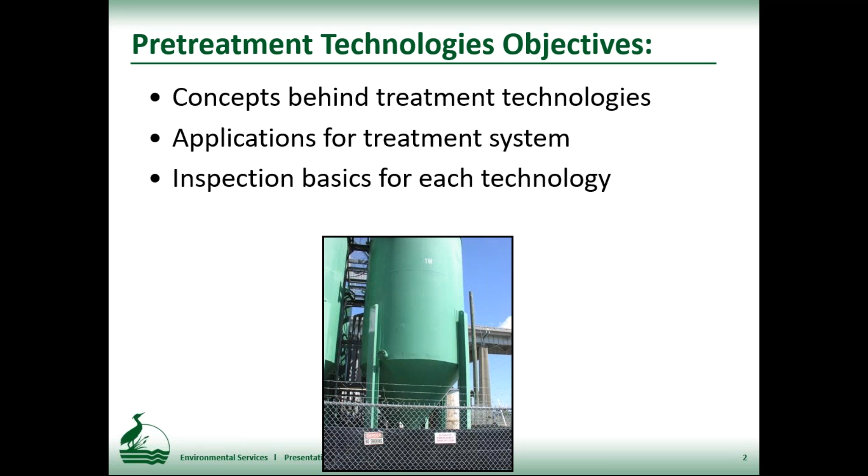All right, so essentially we're going to go over a bunch of different technologies, talk about the concepts behind the treatment technologies, applications for each of those systems, and then what are some inspection basics. And inspection basics are going to be questions. Last week, listening to one presentation, the speaker talked about the importance of just asking questions and follow-up questions. And really, that's been my experience as well. That's how you conduct a really thorough inspection. So I've gone through and redid this presentation with questions in mind.

These are different types of technologies. It's a pretty large presentation, so let's get started with it. First off is equalization. Okay, so equalization, basically all you're doing is providing a lot of capacity that allows variable waste streams and variable flows to collect and commingle. So you get more uniform characteristics in the waste streams, as well as a more uniform flow rate.

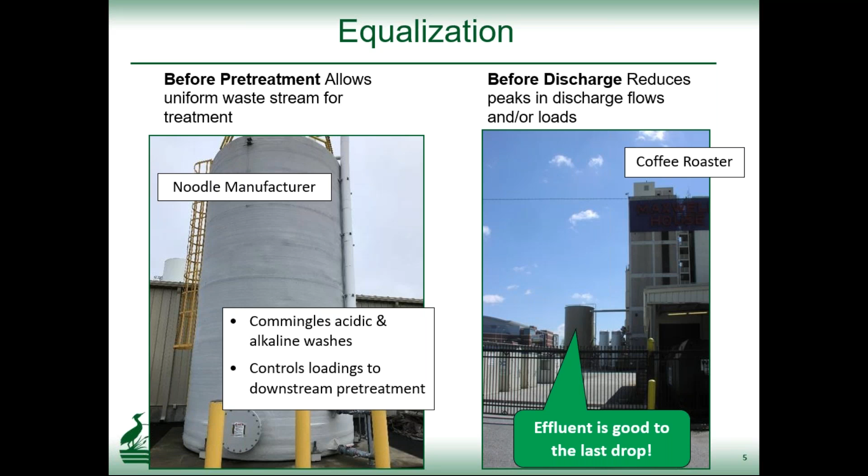We were having issues from their discharges with essentially BOD, or we measured it in COD. And instead of putting organic treatment in, what they did is they just put a really large equalization tank in, and were able to essentially feed effluent from that at a constant rate and get rid of peaks. And I'll show you a graph that kind of shows that effect.

Now, if it's a categorical facility, one of the questions you might ask: are regulated and non-regulated waste streams commingling in the equalization tank? And if they are, have the categorical limits been adjusted accordingly, either using flow weighted average or combined waste stream formula?

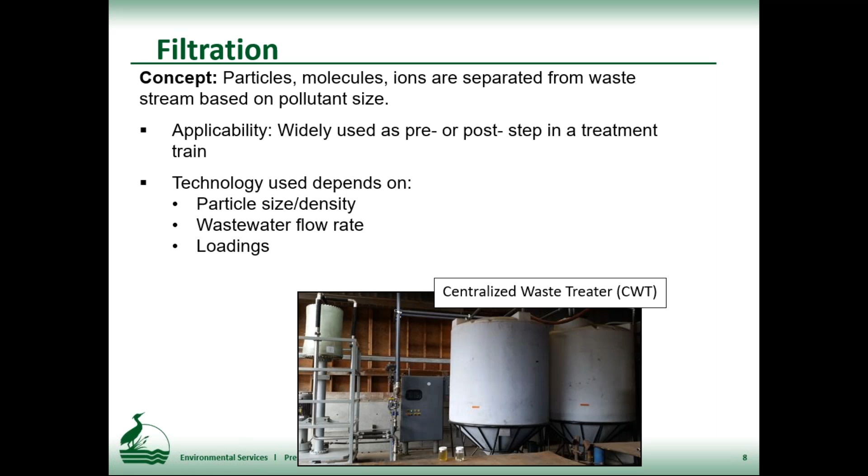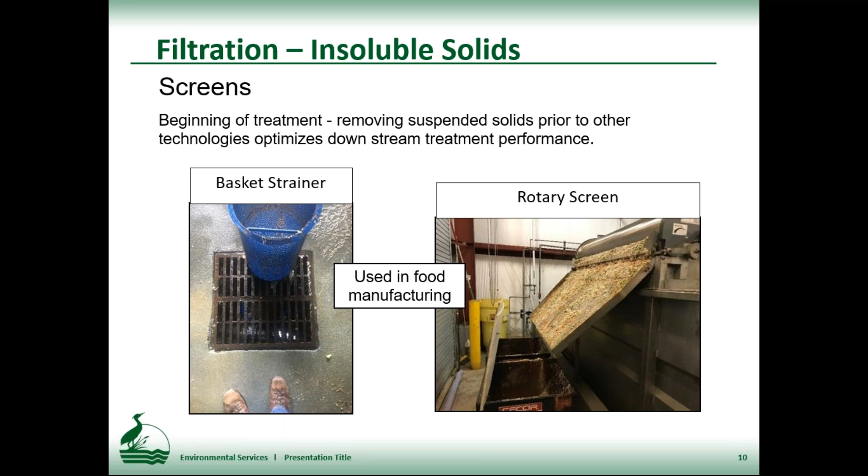All right, filtration. First off, we'll talk about insoluble solids here. You know, just screens, basic screens, basket strainer, rotary screen. Both of these are food manufacturers. These are installed basically for the purpose of optimizing treatment systems further down the line. You don't want these solids going to the further down treatment systems. One, it can interfere with the treatment system, and also it can overload that treatment system with particles that can be much more cheaply removed by using something like a basket strainer or a rotary screen.

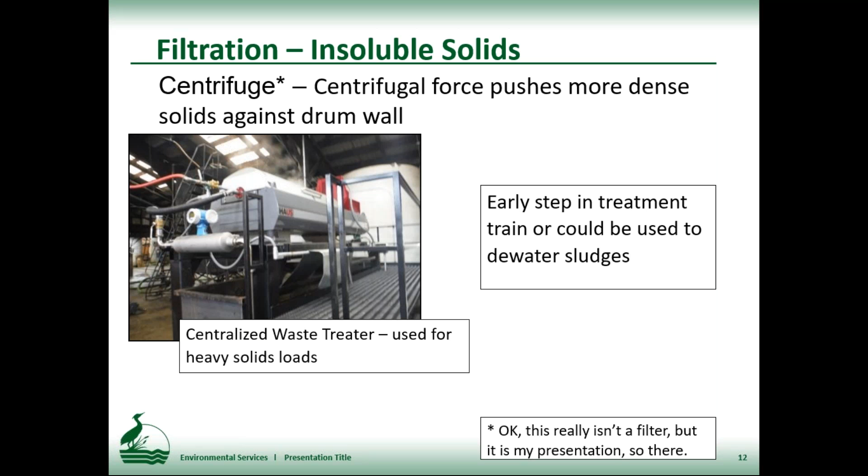All right, filtration inspection tips. How are the solids removed from the filter? And again, anytime we talk about solids, you kind of get the same theme. What's the hauling frequency? What's the destination? Do you have hauling records? Review the hauling records.

I really don't want to go over those, but if you ever want to reference, that was the intent there. So I was going through this thinking there's just not a whole lot to talk about when it comes to filters. I mean, it's tough to really screw up filters. And then I remembered 2017.

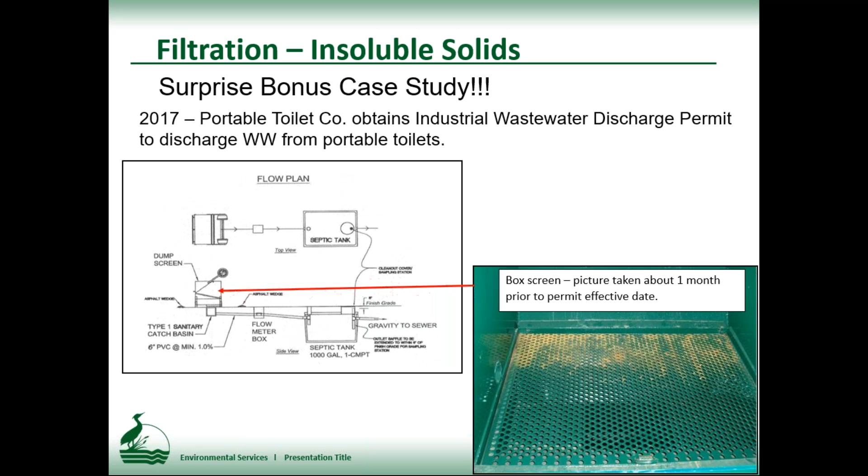So everything looks fine to go.

About a month later, after we're out there, the city pump station fails on multiple days due to clogging. This is the debris they pulled out of here—you see some bandanas, earplugs, a lot of this white material. I have no idea what it is, but I was told it's the backing off a tape called mule tape that's used in construction. So a lot of construction related materials.

This went on for maybe 4 or 5 days before we were ever contacted. Once we were contacted, we asked about any new permittees in the area. We did have one new permittee. We went out there, and this is what we found.

The box spring, or box screen, had a fairly large slit cut in it, allowing solids—as you can see the solids hanging off, large solids—to be discharged through that. This was like the most epic fail in pretreatment permit history.

The very first day that they discharged, our pump station failed. It failed every day that they discharged. They had to maintain discharging records, and every day that they discharged, the pump station failed. We made them fix the screen once we figured out what they had done, and once the screen was fixed, our pump station stopped failing.

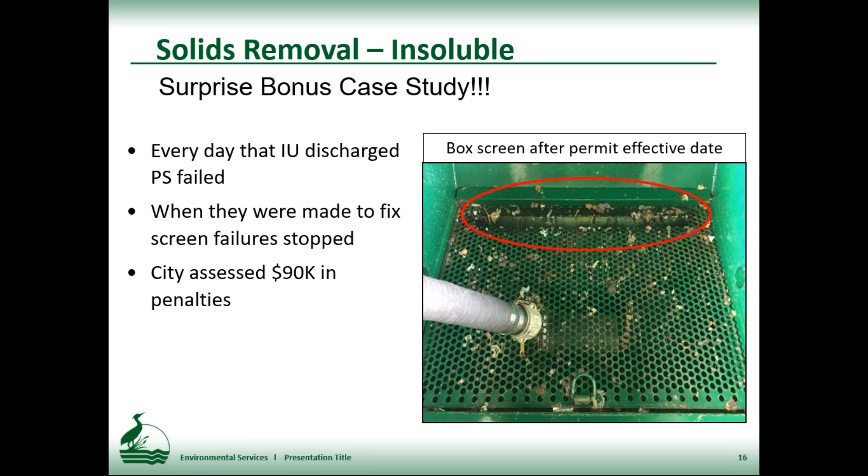So I think it's all about eloquence and presentation. If you're offended by me using the word turd, a code hearing officer feels it's perfectly fine, and it will actually be a successful strategy in an appeals case.

All right, let's talk real quick about solids removal for soluble solids. Previously we talked about insoluble solids—now let's talk about soluble solids. It's typically a polishing step. It's used to achieve, in some cases, stringent effluent limits. In other cases, it may be used just to produce effluent that can be reused. Two basic categories: media and membrane filtration.

For media, one type is ion exchange. You'll see these blue canisters—for some reason blue is like the color of choice for filtration. They're full of all these little resin beads, and these resin beads have a charge on them: a positive charge, which is a hydrogen ion, and a negative charge, which is a hydroxide ion. It's used a lot in water treatment. This graph really shows water treatment, but it works the same way for wastewater pollutants.

So this is just salt, if you're using it to remove salt from a waste stream. Essentially it's a simple replacement: the sodium has a positive charge, it replaces the hydrogen; the chloride has a negative charge, it replaces the hydroxide. So you have sodium chloride solution coming in, and water essentially coming out.

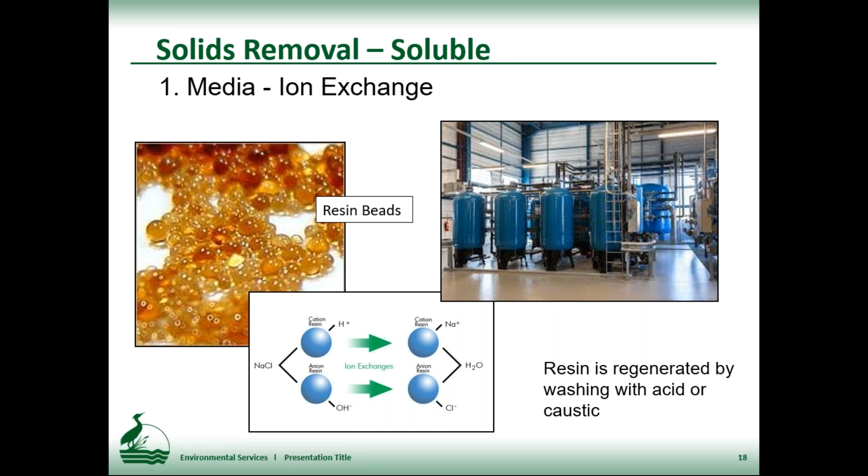If they're doing the regeneration at the facility itself, then you need to ask them, well, how are you doing with the effluent from the regeneration? And you should also be doing some type of neutralization with it.

Another media is zeolite. This is from a centralized waste treater, and they use this because they have some pretty tough metal ion limits as a centralized waste treater, so they use this as a polishing step. It's a natural clay, very porous, so it's got a lot of surface area for adsorption. It naturally attracts cations just from the natural clay, and they can also chemically modify it so it can attract other types of ions and organics as well.

All right, membrane filtration. So these are the different types of membrane filtration. It's all based on particle size. These are the microns.

It goes down to reverse osmosis. This is basically how it works. Your wastewater is going into these tubes. These tubes have a semi-permeable membrane, which basically means it has pores that let certain things in, other things it doesn't let in.

There's a lot of pressure. The water leaves it, and obviously very small ions, depending on the pore size, will also leave this as well, and that's called the permeate. So the clean water comes out, and the concentrate, which is where all the pollutants are, basically passes through.

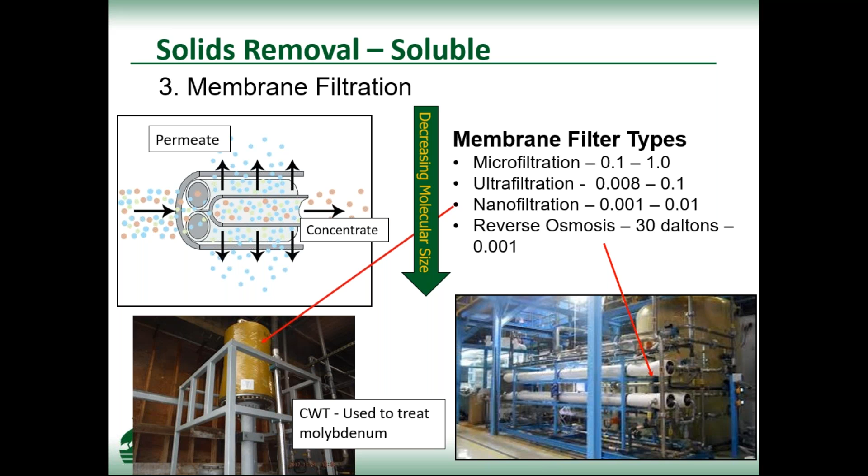So for solids removal, if it's a media, here are some inspection tips. How do you determine when the media is spent? Again, media is essentially going to attract ions to its surface, and after a while that surface is completely filled and it's not going to accept any more ions. Now it doesn't get clogged, the water can still pass through it, so how do you know when your media is spent? What do you use to determine that?

How is the spent media managed? Do you manage it on site? If you manage it on site, what are you doing with those ions that you've pulled off of it to reuse it? Or does a third party take it off site?

If it's a membrane, how is the concentrate managed? You're pulling this concentrate, this water that's full of pollutants. Where are those things going? Are you discharging them back into the sewer system, or are they being managed in some other way? And then what's your membrane maintenance frequency? Remember, membranes have pores, and eventually those pores foul and they do need to be cleaned.

All right, oily water treatment.

Just to let everyone know, during the pandemic most of my verbal communications has been grunts, which really isn't too different from before the pandemic, but it's intensified. So I haven't spoken this much in a long, long time. So if I stop talking, it's because I've lost my voice.

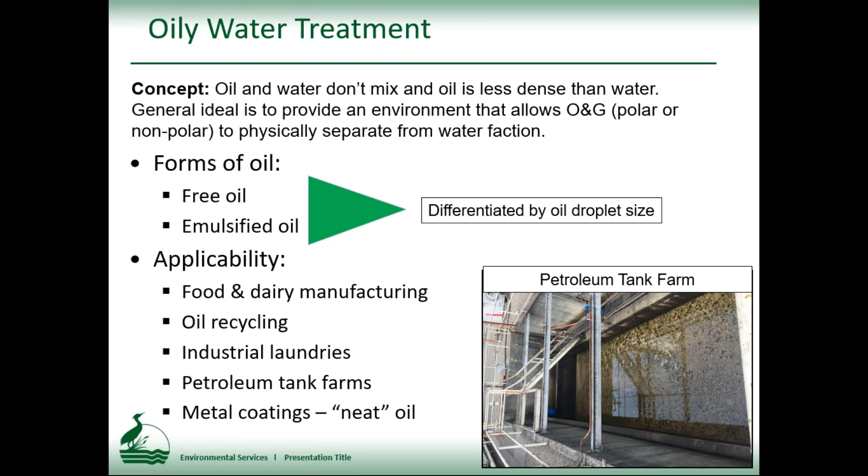This is really important. In industrial applications, oil loadings are an issue. If you have a heavy oil generator, having your typical in-the-ground type of oil water separator can be difficult because essentially you're producing too much oil to be able to physically remove it. So having some way where it's automatically draining off is key for these to work. It'll work if we're talking about an auto shop because you're not producing that much oil. But from an industrial perspective, there'd be a lot of loadings from oil, and you'd have to maintain these things a lot if you didn't have some type of way to collect the oil continuously.

Different separation aids. This is a coalescence plate. Basically, it's made out of plastic, has a lot of surface area. Oil does not attract to water, but it does attract to plastics, so that helps bring the oil out of the water fraction.

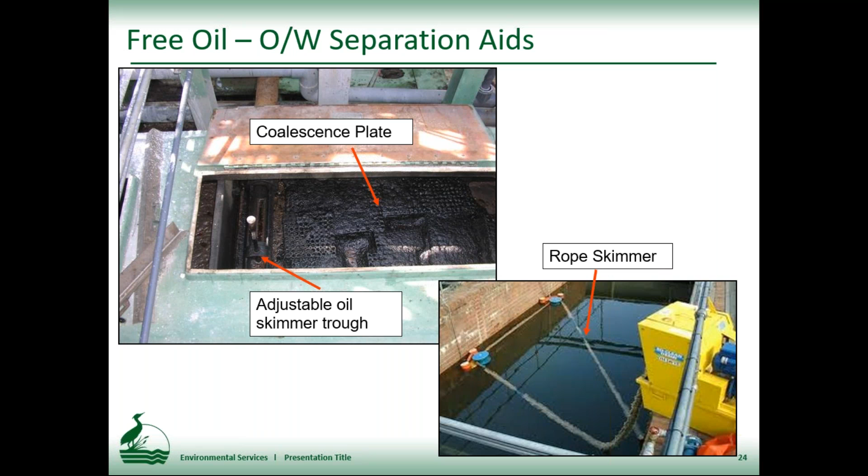Also have a rope skimmer. The rope skimmer has kind of like a plastic type of rope, which attracts oil. It continuously is going, revolving through here. It comes up into this mechanism. There's actually a squeegee in here, and the squeegee squeezes oil off into another container.

All right, so let's talk about dissolved air flotation. The concept is you're going to add chemicals to bind these oil droplets together. Then you're going to put a waste stream into a tank with some pressurized air, and it's going to float to the top. So it's going to create a flock, and that flock floats.

It does work with emulsifications if you reduce the pH. Emulsification agents are things like detergents, degreaser solvents. Mechanical agitation can also lead to emulsifications, which are just really small droplets that are more difficult to separate from the waste stream.

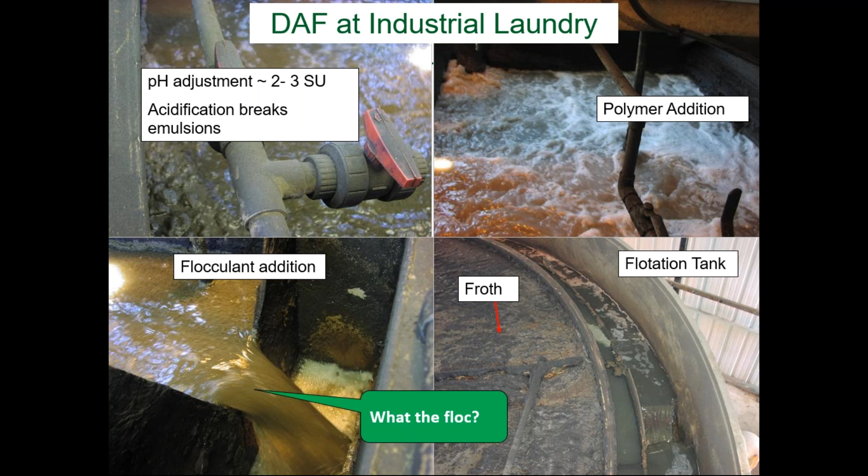One of the big failures I've seen with industrial food production is installing gravity interceptors for grease. The problem with the gravity grease interceptor in a large food manufacturer is they produce more grease and solids than what a gravity grease interceptor can maintain. So essentially, you can't pump them out enough to prevent grease and solids accumulating so that they eventually pass through a gravity grease interceptor. Over time, we've had to require upgrades from these large facilities that initially installed gravity GRDs and haven't put in something like a DAF unit. And those have been successful. That stopped the oil and grease issues that were occurring downstream.

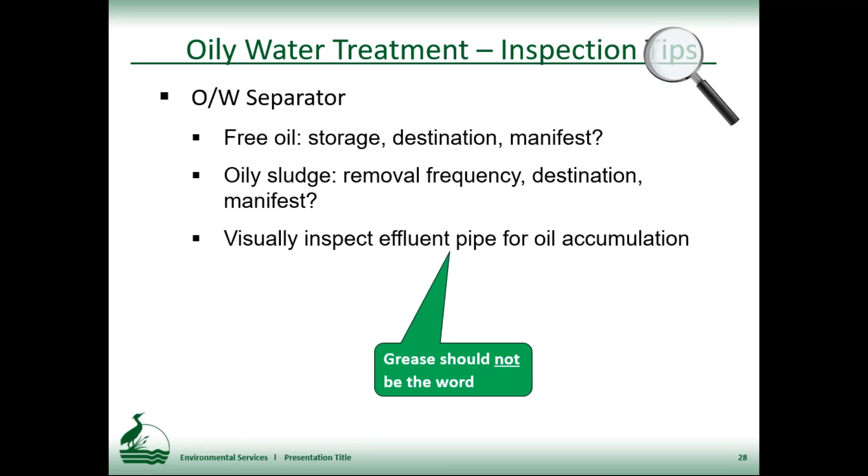DAF units. Okay, so in DAF, you're basically de-emulsifying, or you're bringing these chemicals, these oil droplets together. So how do you determine how much chemistry you need to use to get good treatability? They could be using jar tests, which is a common thing to do. If they are, do you have treatability records? How do you know? Obviously if you're deciding how much chemicals to add, do you write that down? Can you show those to me? If they are adding acid to break up emulsification, what's the target pH?

And again, froth sludge disposal, same old disposal stuff. And again, inspect the float tank. Do you actually see froth formation? I was at a centralized waste treater that was causing some issues, and looked at their DAF unit. It was like a Soviet era DAF unit that they got off of Craigslist or something. I looked at it, there was no floc forming, and when I looked at the float tank, there was nothing on the surface, which you'd think, if it's supposed to float things, that doesn't seem to work. And so that was an obvious issue there.

Terminology. The only thing I want to talk about for terminology is you'll hear the term soluble oil. There's no such thing as a soluble oil. Soluble oil is a highly emulsified oil, and a lot of times it's used for machining work. It needs a special type of treatment. It's still an acid cracking, but a DAF unit may not work on these. So a lot of times a facility will employ a tank, typically a heated tank, and it's called acid cracking. They drop the pH between 2 and 4, add some heat, and it breaks out the oil emulsification. So if you have something that's just highly emulsified, that might be your only solution. It's kind of a batch discharge that you would do with this really unique waste stream.

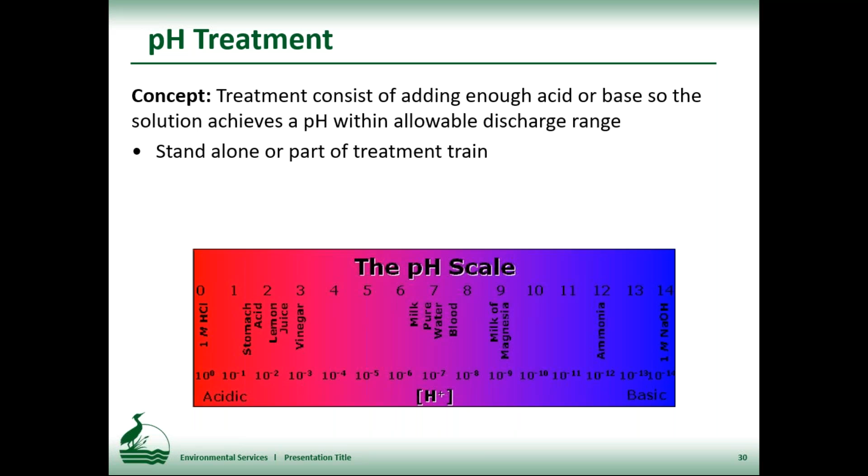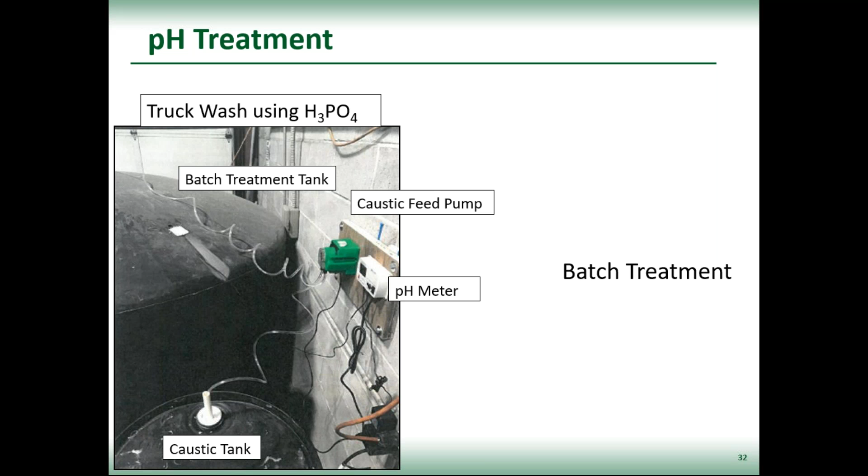Okay, so pH, probably the most common type of treatment used in industries. These are the different types you'll find it at. It's used a lot in food and beverage. You have clean in place systems, which are doing caustic and acid washes, which we've discussed a lot already. It can happen as a batch. That's a truck wash using phosphoric acid to brighten up the metals, which caused some issues. They were able to put in just a batch treatment tank that holds the washes. They have a caustic feed pump, pH meter, feed it in. It's pretty tough to mess up. But my experience is, after 20 years of doing this, somebody somewhere is going to find a way to mess it up.

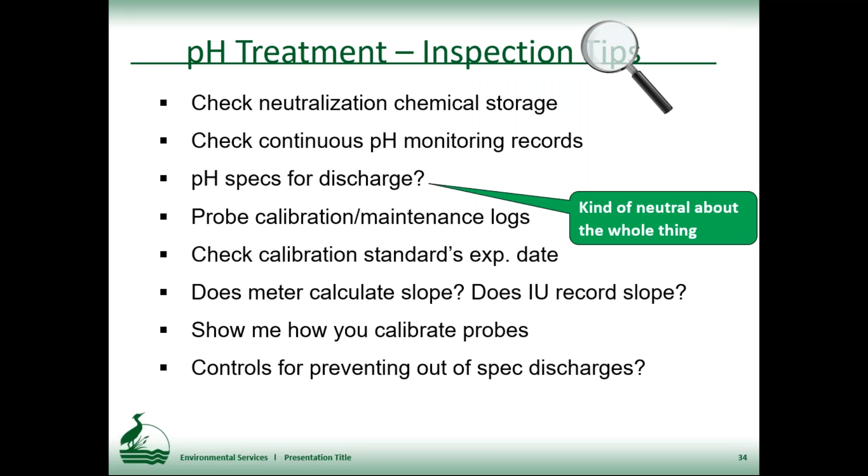All right, so here's a chemical precipitation at a job shop, essentially mix tanks. Chemical precipitation occurs first. You got metal ion, you increase the pH. Metal hydroxides are insoluble, but they're also really small. It's like a pin floc, so they're not going to settle very well. So you then need to add some type of chemical addition to make flocculants.

So you coagulate it, create a flocculant, and then you send it to a clarifier, which again provides time for it to settle. The floc settles. See a little cone bottom tank, sludge comes down here, sludge is then pumped to a dewatering process.

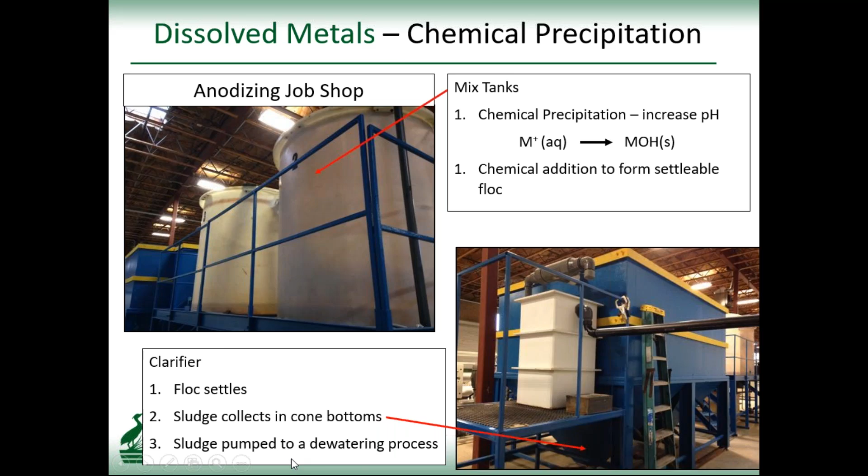Does sludge go to the holding tank prior to dewatering? If it goes to a holding tank, the supernatant is the liquid that's above it. The sludge is going to settle down. That supernatant, what do you do with it? Should go back for pretreatment.

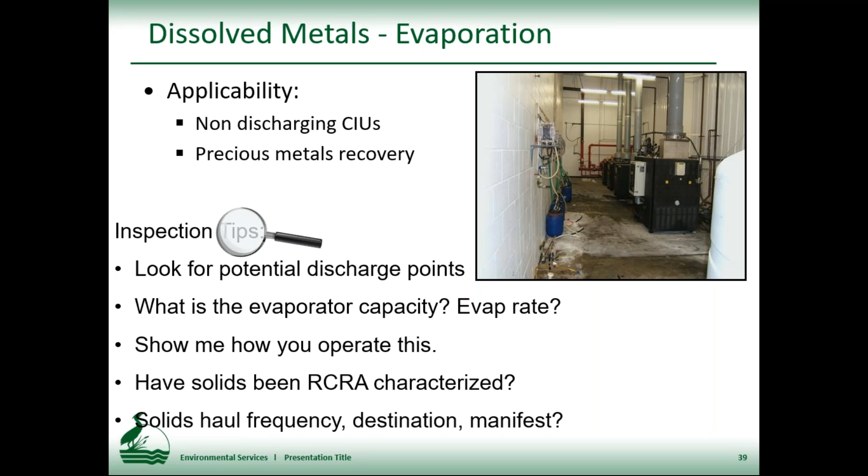Let's talk about activated carbon filtration first. This is typically a polishing step. Carbon has a lot of porous sites on it, and organic chemicals will adhere to those, so they would adsorb to those. Okay, so it's often a polishing step. Here's another blue tank, and it's full of granular activated carbon that goes in here. You could also have powdered activated carbon. Powdered activated carbon is much finer, so it has a greater surface area.

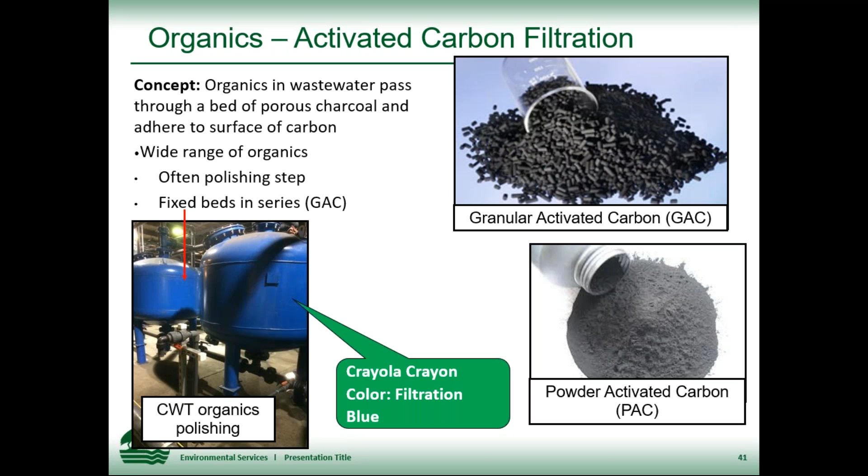Usually you won't find it in tanks. What they could do is a batch treatment. So let's say that you have just a tank and you want to polish some organics out of it. You could actually introduce the powdered activated carbon on top. It goes down to the bottom and settles, and then you collect it from the bottom along with the sludge. So that's kind of one way that you'll see that used.

Inspection tips. How do you know when the carbon is spent? Again, you're taking up surface area on the carbon with these pollutants. After a while, all that surface area is taken up, so it's now spent. How do you know when it's spent? Because once it becomes spent, pollutants just pass through it, and the terminology for that is called breakthrough. What's the carbon replacement frequency? What do you do with the spent carbon? Where does it go? It can be reactivated. So some places can take it and reactivate it.

All right, air stripping. So contaminated water, basically, we've got this gizmo over here. This gizmo is full of these plastic packing materials. It increases contact time. You're going to introduce wastewater. It's typically for volatiles. And you're going to bubble air in there. And so the air goes through the water and it actually strips away any volatiles, and volatiles would come up through the top here. And again, where I've seen this used exclusively is for groundwater remediation applications.

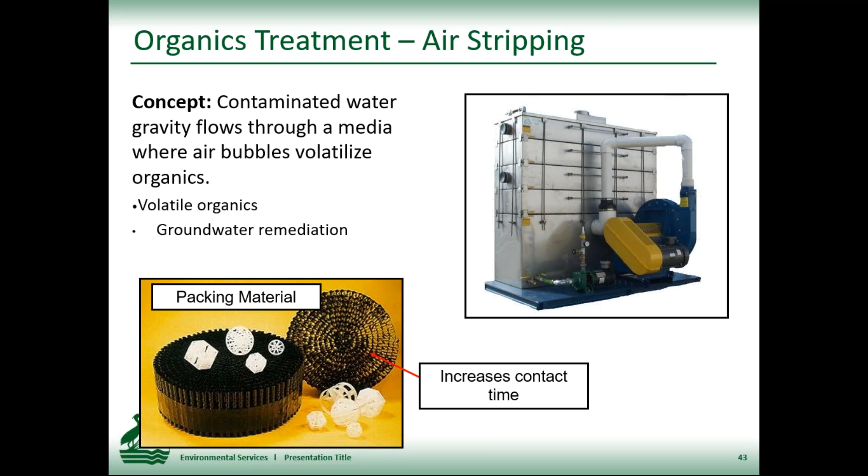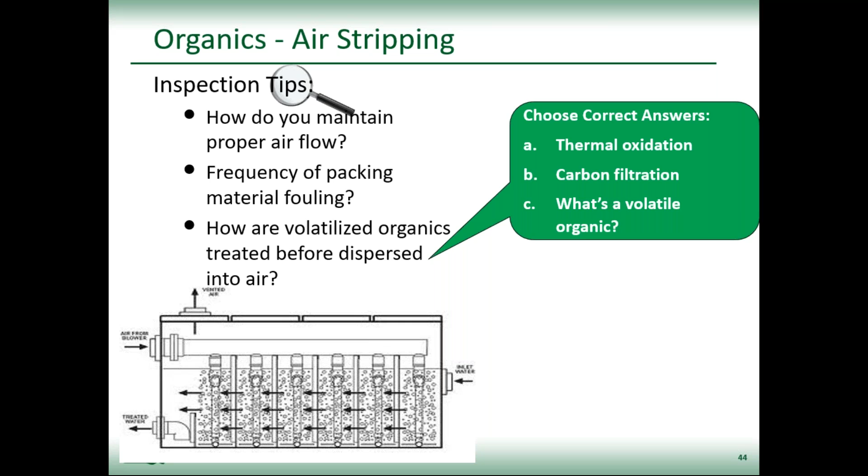All right, inspection tips. How do you maintain proper airflow? If there's a lot of other gunk in the water, that packing material can start to foul. And then how are the volatile organics treated before they're dispersed in the air? You're introducing volatile organics into the air. That could be an issue. They are treated two different ways: through thermal oxidation, essentially you just burn them, and volatile organics are converted to carbon dioxide and water, or they can go through carbon filtration as well.

Biological treatment, again, Bob's going to cover this stuff. Essentially, you're going to maintain an environment that optimizes bacterial degradation of waste streams. This is an aerated pond at a really large organic chemical manufacturer in Jacksonville, Florida. It's amazing how bacteria can adapt to a wide range of organic compounds, not just what we typically think of as BOD. They can adapt and they will treat semi-volatile organics, benzene, xylene. They can be in aerobic or anaerobic environments.

This is the type of treatment we use at municipalities. At municipalities, the bacteria get all the nutrients they need from what we flush or drain down from homes. That may not be the case at an industry. So sometimes they'll need to add nutrients such as nitrogen or phosphorus. So that may be a need there. It is heavy solids generation; it produces a lot of solids, which are all those bacterial bodies, and can be a high capital and operational expense.

This is a transportation equipment cleaning facility. Had a lot of issues with solids. This is a dairy. This is Alpen Dairy.

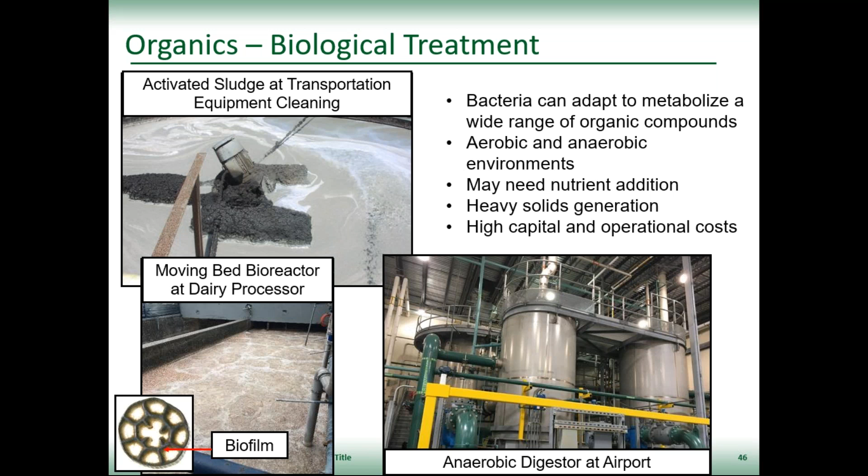They basically use a moving bed bioreactor, which has plastic carriers suspended in the tank. Biofilm collects on these carriers, and this is where the biology breaks down the BOD. This is at PDX airport. For de-icing, they use glycols, and glycols have a lot of BOD. They're very biodegradable, so the airport uses an anaerobic digester to treat the ethylene glycol.

Now for inspection tips and process control tips: what do they use? They have to take care of this living environment, so how do they maintain it? It takes a lot of work to do that. So what process control tests are used?

Whatever tests they have, they should be documenting those tests or reviewing the operational logs. How do you determine when to waste sludge, and how is the sludge dewatered?

Now moving into sludge dewatering, the last type of technology. First, cone bottom tanks. A lot of places will send sludge to a cone bottom tank. The sludge settles here and you have a supernatant. You draw the sludge off the bottom, and the supernatant should go back to treatment. The sludge from the bottom then goes to some other type of treatment.

Typically, some type of conditioning has to occur. Here, they're adding diatomaceous earth and feeding a slurry of the sludge and diatomaceous earth to a vacuum drum. It creates a vacuum, has pores, and brings that sludge and diatomaceous earth slurry to the drum, pulling the water portion into the drum. As the drum rotates, it scrapes the solids into a little hopper.

The water from this is called the filtrate, and the filtrate has to be returned to the head of treatment. The filter press again uses a sludge slurry with filter membranes on each plate. The particulates adhere to the different membranes, get dried, and then it opens up and drops into hoppers. You'll see these throughout DAF units, metal precipitation, and biological treatment—all of these can utilize some type of sludge conditioning.

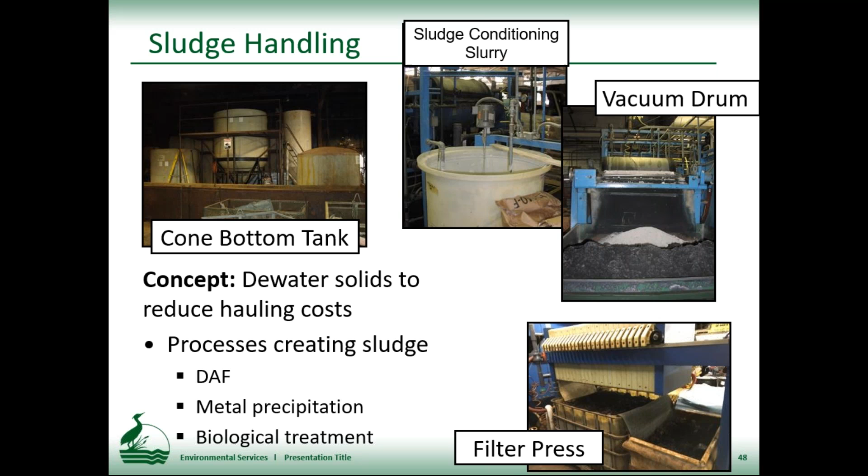The whole idea behind sludge conditioning is just to reduce hauling cost. If they are doing some type of conditioning, what substance are they using? Where does the filtrate go? It should go back to the head of treatment. Has it been RCRA characterized? All the usual solids questions.

So there are a lot of questions you can ask about any type of technology. You may not know the answer, and that's okay. What you're trying to determine is if they know the answer. So don't feel intimidated if you don't know what the real answer is—you don't have to know it. Let them answer it. Sometimes it'll be obvious that they know what they're talking about, and sometimes you may not be so sure.

Those are the times you take notes, and after the inspection you do some research on your own to see if what they said makes sense. Don't be intimidated by not knowing the technology enough to ask specific questions. Ask questions to get them talking, and use your own judgment to determine if these people seem to know what they're talking about or not. If they just ramble a lot, that's a pretty definitive answer right there.

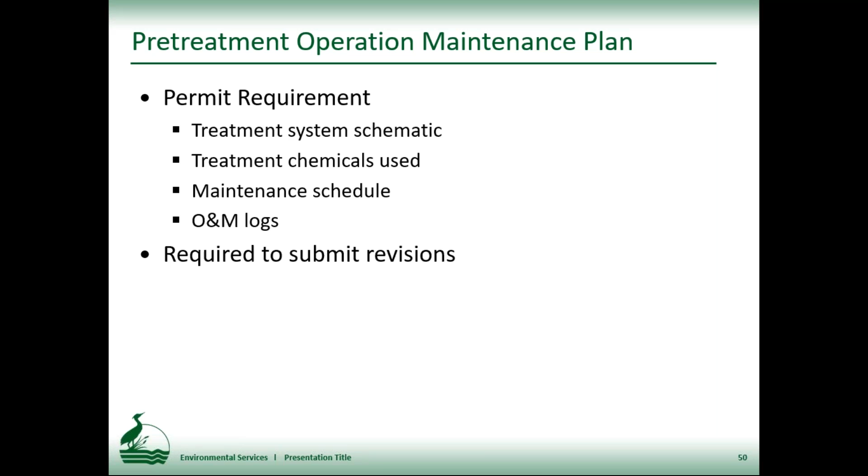And that's it for me. Any questions?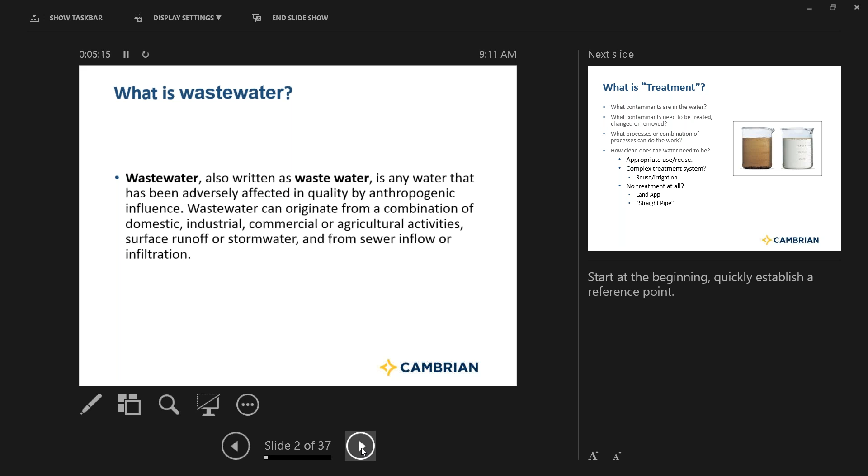They're also coming to capacity on some of their facilities. So we're entering a new realm in terms of being able to control industrial dischargers, and understanding some of those issues will help all of us. When we talk about BODs, we're really talking about huge, wide-ranging differences from both municipal scale sewage as well as day-to-day fluctuations in the facility itself.

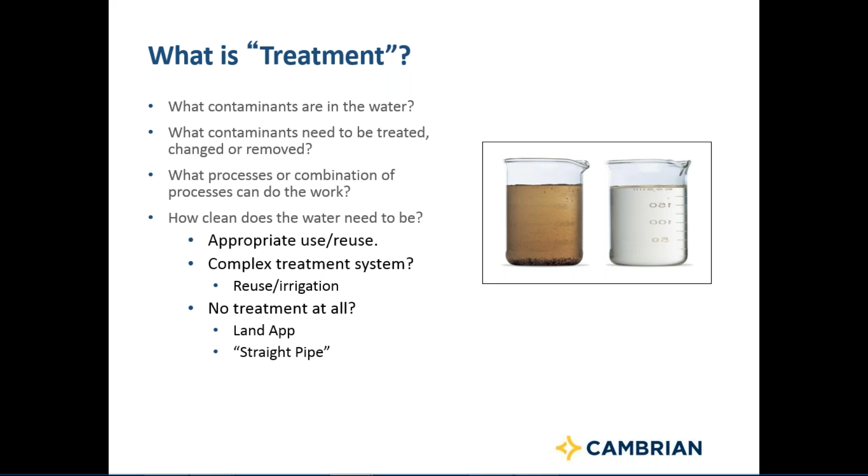So there's a number of things that are sort of driving the industry and changing things for food and beverage processors, and BOD was one of those. It's also starting to be regulated as an agronomic limit. This hasn't been done a whole lot up until now, but now folks are starting to look at that from a permitting level, on how much BOD you can apply to a certain number of acres per day, as an example. It hasn't been as well regulated up until now, but it's becoming more and more of an issue, as well as TDS. But we're not going to talk about that specifically right now.

So why treat wastewater? In industrial pretreatment, we're really looking to reduce the load on the POTW. Surcharges, looking at reuse, lots of effects directly for industry. Overall though, in trying to deal with and explain to folks the effects on the POTW, that's where I think there's a little bit of room for some education. I think it really helps folks to understand just what downstream processes they affect as a facility, and the levels of effect can be reasonably felt.

I do know of some folks, and I'll try and be really generic, but say a particular brewery that can affect the operation at the POTW if they make a mistake, more or less. It can actually have a direct and almost immediate effect on the treatment plant for the entire community. So I think there's more and more folks that are becoming aware. Obviously, for all of us on this call, we're quite aware that's the function of the industrial pretreatment groups. But I think in general with industry, coming at it from an education standpoint, being able to talk about what you're doing affects everything downstream is worthwhile to talk about.

In that vein, biochemical oxygen demand, a little bit of history that is mostly gone now, used to be biological oxygen demand. It is the available dissolved organics or particulate organics in the wastewater that will create an oxygen demand on a receiving water body. So if you put food into a receiving water body, bugs and other aquatic organisms are going to try and consume it. And if that's done in an aerobic condition, it will deplete the dissolved oxygen from the receiving water body, creating that oxygen demand.

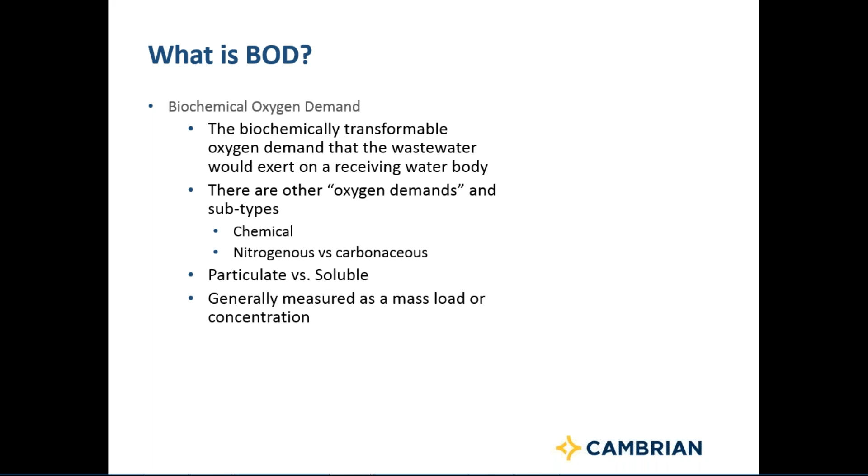There are other oxygen demands as well, not really within the scope of a 45-minute presentation this morning, but nitrogenous versus carbonaceous - a big deal for wastewater generators that treat sewage. Nitrogen issues, phosphorus, nutrient issues - those types of things also exert oxygen demands. They also are necessary nutrients, however, to drive the process for biologically digesting the carbonaceous materials in BOD. So as Dan mentioned, you might have to add some nutrient to an industrial discharger, food and beverage discharger, to facilitate these biochemical reactions. Think of it like adding the NPK ratio to a compost pile - 100 parts carbon to smaller parts of nitrogen and phosphorus. That similar ratio is often necessary to get the maximum amount of biological digestion on the carbonaceous material.

From an entire wastewater treatment perspective, you are looking at a whole bunch of different parameters. I'm going to focus on BOD, but just so we acknowledge there's a whole bunch of others out there - some appropriate to certain facilities, some not so much. There's a whole laundry list of things we'd take into consideration in working with an industrial discharger. BOD ends up being one of the biggies, one of the heavy hitters, along with flow. Fats, oils, and grease is another one, and there are a few interrelated characteristics - break those molecules up and they become BOD, sort of that kind of thing. But I'm just going to focus mainly on the carbonaceous substrates in BOD.

Also, if there are any questions, you won't derail me, so feel free to blast them out at me during the presentation, but I'll keep going. I'll just keep rolling. So someone just interrupt me.

One of the components that I find is surprisingly not ignored, but just not considered all the time. Again, it's going to be something that everybody on this call is going to be super familiar with, but in industry, not so much, is the concept of total load of BOD. Everybody in the industry looks at concentration, milligrams per liter.

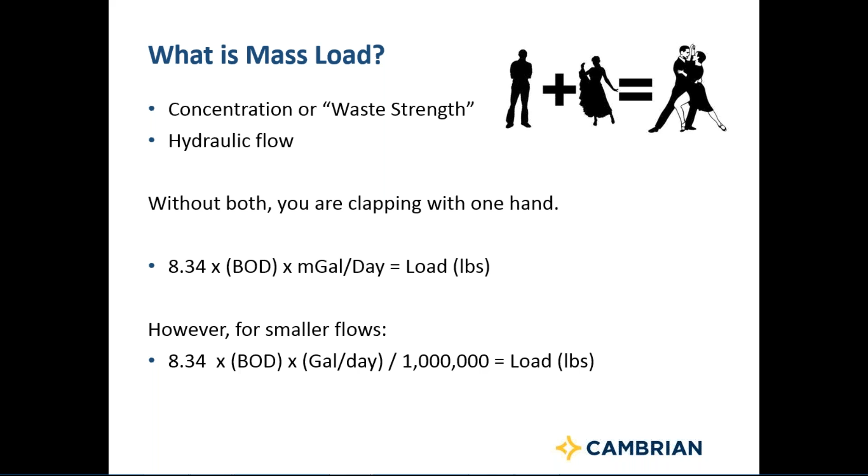And I find that this concept, in the folks I've talked to, is not often really well understood. It often boils down to a concentration, trying to get down to a certain pH in their effluent, to a certain concentration in their effluent, but looking at it in terms of pounds, that's a little bit foreign. So again, here's an educational opportunity for folks that isn't technology dependent, not operation dependent, but it can give more context for folks in these industrial discharge situations.

So what is the waste strength? Raw sewage is something that most folks have an intuitive sense of. They have some experience with it. Comparing their discharge to sewage is often the comparison that you hear. That's what they have available to them in context. So milligrams per liter is the most common unit. It also corresponds to parts per million. That's fading away; hopefully we'll all end up in metric someday. But it's a very small quantity that we're used to hearing.

The old Ivory soap commercial, 99.44% pure, so pure it floats. That was the commercial and the marketing when I was a little kid. 99.44 is actually quite close to the accepted values for brewery wastewater. We're looking at 5,000 BOD, that kind of a thing. Raw sewage is far, far cleaner than that. So when we're talking about something 99.5% pure, 99.4% water, you're looking at something that is many, many times nastier than raw sewage. Kind of an interesting thought.

Hey, Bob, a real quick question. What is the best pre-treatment for BOD? No way to answer that. It's going to depend on the facility, and it's going to depend on the type of BOD and what the source is. There are many ways to pre-treat and help reduce BOD.

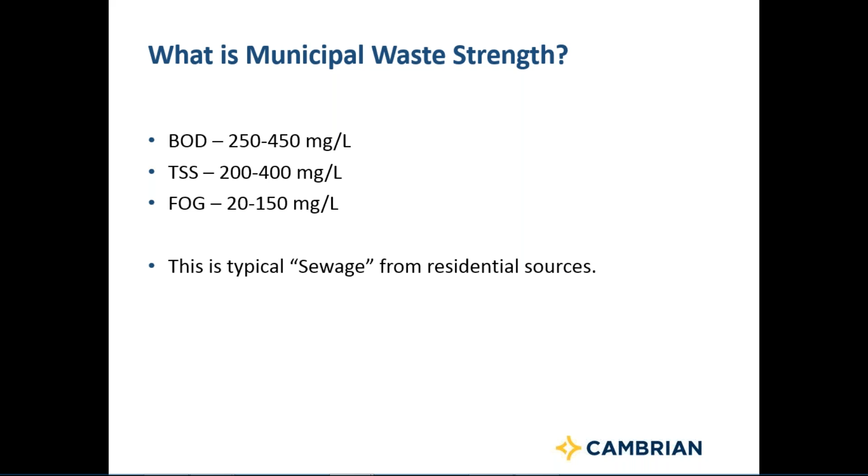So for municipal waste strengths, we're looking at a BOD of say 250 to 450 milligrams per liter, somewhere in that range. Typical sewage from residential sources, what everybody thinks of in terms of raw sewage. What is high strength waste in the food and beverage industry? There are some actual things in regulations, some rules that actually define high strength wastes. Generally, from my research, they are just called higher than typical municipal wastewater. But how much higher is kind of the deal?

How high can BODs go in a facility? 1,000 BOD, 3, 4, 5 times as much as municipal. Is that high strength? 5,000, 10,000? I've seen numbers on paper, lab reports, and things as high as 30,000, 40,000 milligrams per liter. So where do you put that if you're trying to categorize?

Again, this is the wheelhouse for everybody on this call, not necessarily though in industry. So how do you regulate that? Is it a concentration limit like they're doing in El Paso now? Is it a total load limit, which would probably be the most fair in some sense, but it's going to be a little more work to get that granularity.

Categories for concentration, having moderate high waste strength, a little higher strength waste, and then like ultra high strength waste or something like that. In those types of scales that I've seen, which work really well for putting together a program and simplifying it, the high category or the super high category has simply not been high enough. And so you really disincentivize everything, because once you reach a certain level, then you dump everything.

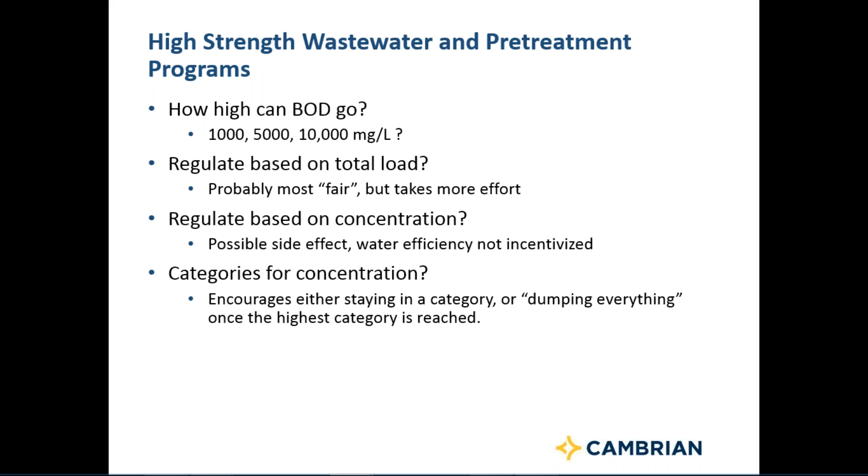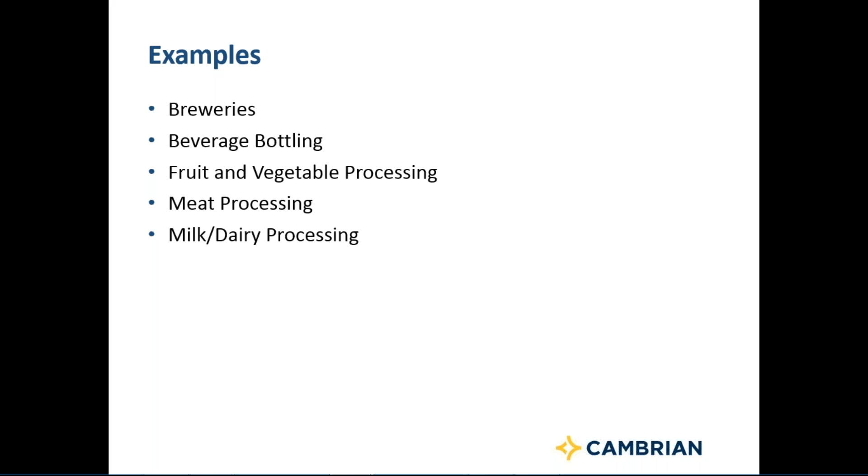So I'd like to dive in a little bit, because even though we look at each one of these as individual, say, verticals in the industry, there's a tremendous amount of variation even inside of each one of these verticals. So brewery wastewater, this has been the topic of pretreatment folks now for the past, say, 10 years. It comes up at every conference.

Looking at brewery wastewater, the explosion really in terms of microbreweries and regional craft breweries has been neat from a beer drinker's perspective, which is fine. But on the other hand, from a wastewater perspective, people have been noticing. Folks have actually really been noticing. It's just a little rinse water. You know, you're just rinsing out the tanks from your brewing process. So what's the big deal?

Well, that rinse water contains dissolved sugars, a little bit of alcohol, obviously. Alcohol is very soluble, straight BOD. The particulates, okay, so now you've got yeast and trub. So this is another piece of it. Yeast and trub is basically the spent yeast, or the yeasts that have settled to the bottom of the primary fermenter, particles of hops and other adjuncts that are added.

Spent grain is the chunks of malt, the larger particles that are part of the mashing process to get the sugars out. They're the source of the starch that gets converted to sugar. That is generally removed and then, say, fed to pigs or something like that, and hauled off as a solid waste. But there's a lot of the smaller solid material that is left in smaller breweries. It's just left in the waste stream and discharged.

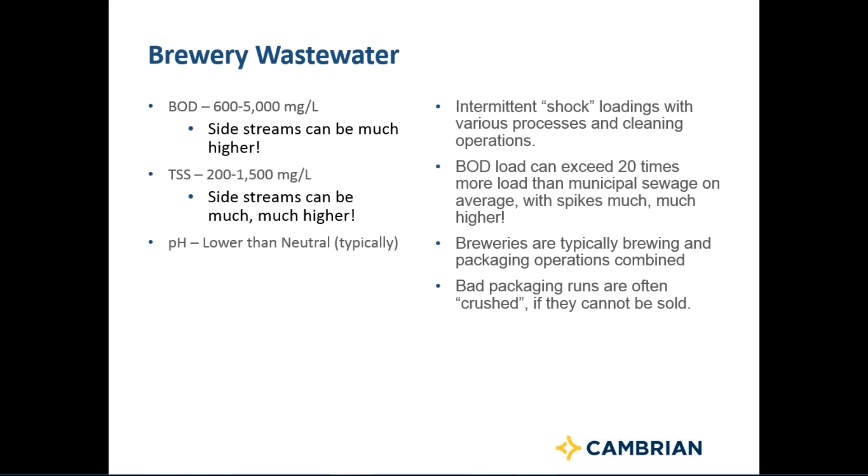But if it was a bad run that they can't sell, then especially in the larger facilities, they'll crush the material, the liquid goes down a floor drain right into the system, and the rest of the stuff goes to the landfill or gets recycled. That can be an enormous spike in load as well. And without a treatment system in place, that just goes straight to the POTW.

Beverage bottling, this is something that we have some experience with as well with some of the larger bottlers. There's wide ranges, just like in the brewing industry. There's some parallels amongst all of these verticals. In beverage bottling, you see this with breweries as well as large soda bottlers, smaller craft bottlers, all the way down to boutique kombucha bottlers, which is becoming very popular. You're looking at BODs from a large soda bottler in the 3,000 to 7,000 milligram per liter range. But those unique events, can and bottle crush, can be absolutely enormous, 30, 40,000 milligrams per liter.

Where the bulk of the wastewater load comes from, say, a Coca-Cola or Dr. Pepper bottling facility is when they do line changes, switch out all of the equipment to a different flavor, for instance, run a different syrup. And then in the rinsing and cleaning operations, you're getting basically sugar water rinsed directly down the drain. It's going to be low in nutrient. It's going to be extremely high in BOD.

All right, pH is generally low. Acid plus sugar tastes really good. And so whether it's orange juice and you're looking at acid sugar that comes out of a fruit, or an engineered beverage, like one of my favorites, Mountain Dew, you've got sugar and acid combined to make it taste good. And that's a characteristic of a lot of food and beverage products in general.

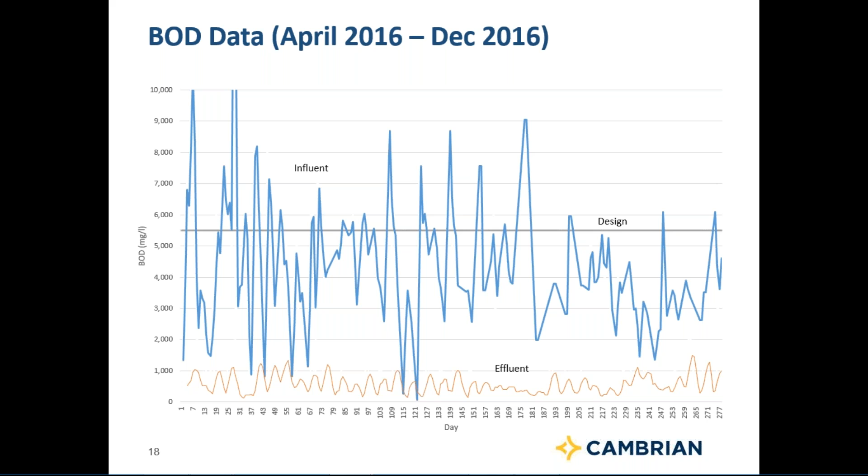This, I also will mention, these numbers come after EQ tank. So this is equalized flow going to the pretreatment unit. So that type of a fluctuation, really, really hard to deal with. And again, just bringing this into context for folks so that people in industry understand what they're doing to the downstream processes. Super important, can't emphasize it enough.

Okay. However, in terms of generalizing vegetable processing, for instance, or fruit processing, there's a ton of different facilities out there doing a wide variety of products, everything from juice to retail packaging, bagging lettuce, making value-added products, that kind of thing. So it can be very, very difficult to generalize and categorize the biochemical oxygen demand coming from a particular facility. So just saying a juice manufacturer or just saying a fruit and vegetable processing facility is not very descriptive at all. It really does boil down to the individual facility being evaluated.

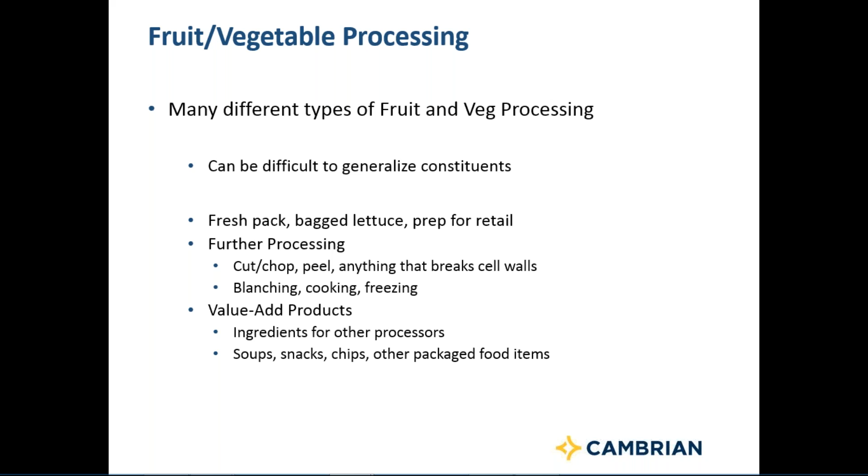But if you're looking at everything from blanching, cooking, freezing, cutting, chopping, ingredients, making food ingredients for other processors and value added, it's a huge wide range of constituents. And when you're getting to the finally prepared fruits and vegetable things, soups, snacks, chips, other packaged food items, FOG becomes a bigger issue again, changes the whole nature of the wastewater that's being generated. But in general, BODs are through the roof, measured in the thousands, and can be a very big impact on downstream processes.

Seasonality for fruit and vegetable processing is probably the biggest issue that needs to be dealt with. Both the load and the flow will peak during whatever season of that fruit or vegetable is being processed. In wineries, you're talking about crush season in the fall when the grapes are coming off the vines and going through the process to get them into fermentation. In this particular facility, it was sweet corn getting harvested, packaged, and frozen, going from a few thousand gallons a day to over 1 million gallons a day over a few weeks, with a corresponding increase in BOD from virtually zero to thousands of milligrams per liter. And it overwhelmed 80 million gallons of storage.

It happened to rain, they couldn't land apply, and it filled up the whole valley with odor. These are some issues related to BOD and the magnitude that one particular facility can have on a region.

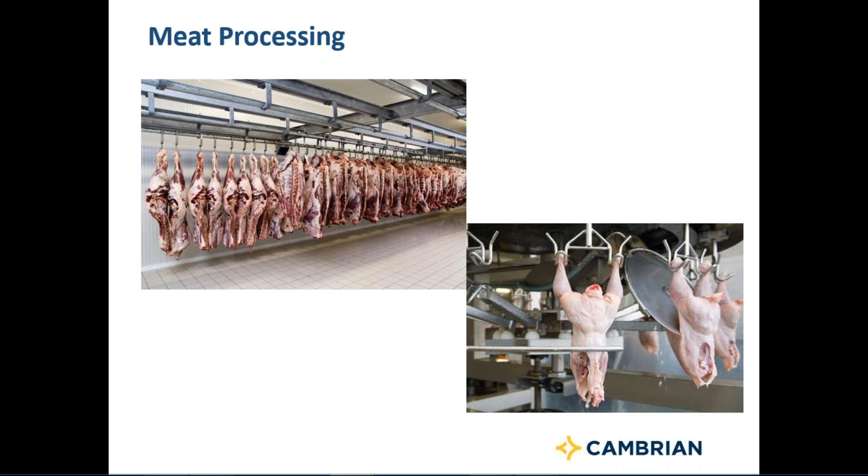Another one that pops up fairly often is meat processing. A lot of times we're thinking about the abattoir, the slaughterhouse. That's one of the difficult ones. Many times these are located outside of cities, so you're not looking at an abattoir being downtown any longer, as they once were. But it's still very difficult to generalize. There are many different verticals within the meat processing industry. You've got slaughterhouses and abattoirs, but also further processing, taking the entire carcass and cutting it up for retail sale, freezing, and then value-add products, food ingredients, and making everything from chicken nuggets to canned soup and all the stuff in the frozen aisle at the grocery store.

Many different aspects to meat processing, and they all have different wastewater constituents, different levels of BOD. One thing to keep in mind is that when we're talking about things like blood, it's very biologically accessible, with a high level of solubility, and very, very high BODs. Very similar to, say, sugar.

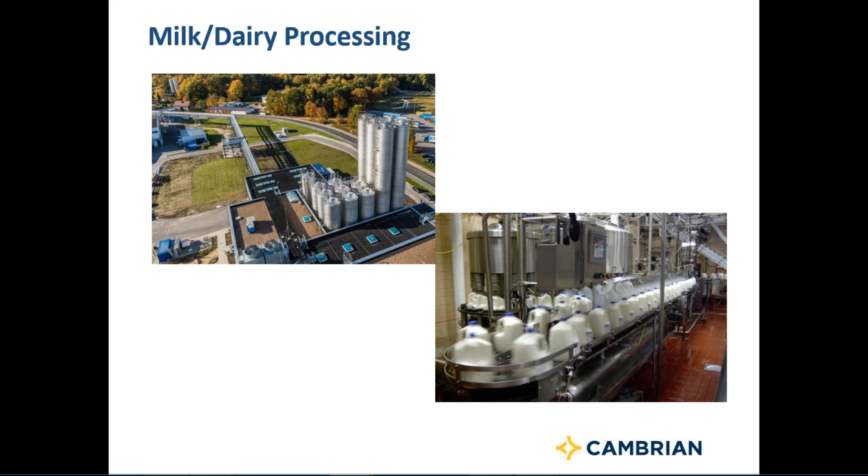Milk and dairy processing is another market vertical that has a lot of sub-verticals. If you're looking at a facility that bottles milk or retail fluid milk, there are lots of different verticals. Interesting pattern - this is how a lot of the food industry is. Many different verticals, many different individual processes sort of lumped under individual umbrellas. For our purposes as wastewater folks, we really have to look into it a little deeper. It can be difficult to generalize constituents.

You've got fluid milk bottling where you've got rinse water from milk vats - basically very dilute milk. Then some of those bottling facilities bottle other beverages like orange juice, in which case they're really more like a beverage bottler than someone that makes, like Chobani, that makes yogurt. Then there's a lot of value-add processing - butter, ice cream - where fats, oils, and grease become a bigger issue. Yogurt, cottage cheese, and cheese manufacture involve fermenting some of these milk products and generating acid in the wastewater itself. And then you've got dried milk powder and food ingredient manufacture, a totally different process, where you're making dried milk, which is available for retail.

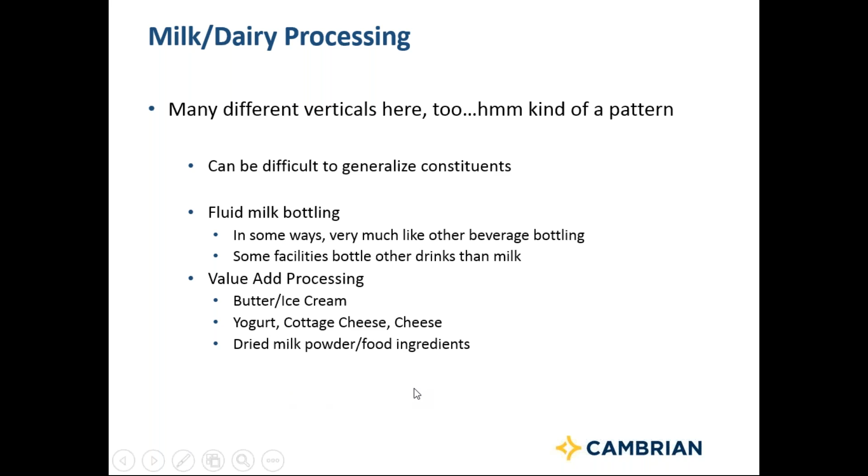Oh, let's see where we're at now. There we go. So real quick, something to think about - a little thought experiment.

Okay, this is how I got through college. I know there's a brand name on there, I hope I don't get in trouble, but one can of this soda has about 46 grams of sugar. It's about 12 ounces of liquid. And if you imagine, and do the calculation, if you assume sugar is C6H12O6 - that's an assumption, it's actually mostly corn syrup - if you spilled one 12-ounce soda down the drain in a home that generates an average of 200 gallons per day, you've increased the BOD load from that home by about 10%, just from one can of soda. And that soda product might be in the neighborhood of 100,000 milligrams per liter.

So having this idea is understanding that sewage at 400 milligrams per liter is products that we eat and drink and have interaction with every day. We don't think of using the same units, and before I really dove in neck deep in this research, I didn't either. Very knowledgeable in wastewater by that point, rather knowledgeable in drinking Mountain Dew, and making the connection between the two - that the difference is 100,000 milligrams per liter versus 400. That was something I missed. So I think this idea that our everyday products and things involve really, really large numbers when we're looking at wastewater is worthwhile to convey and communicate.

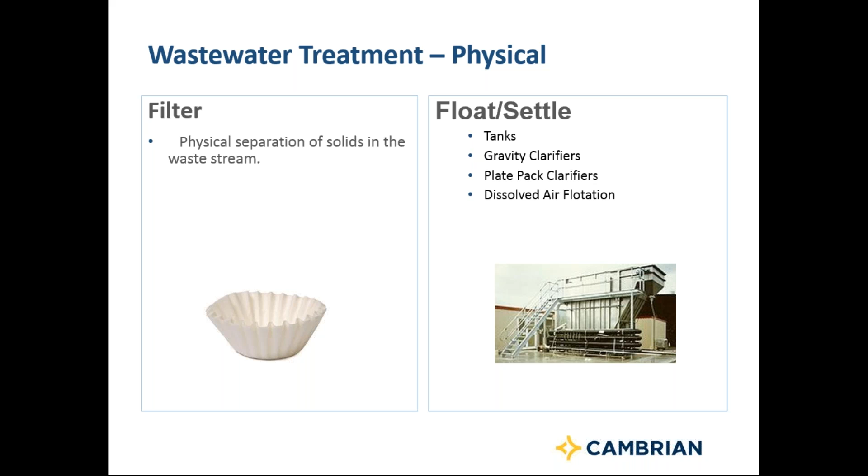These are removing particulate material, or you make particulate material out of the waste stream and either float it or sink it, or do a little bit of both, trying to get it out using gravity one way or the other. These are very effective in many food and beverage applications. Smaller facilities will often just use a tank, letting it settle and manually decanting, but larger facilities often use something like a DAF, which is very effective especially for fats, oils, and grease and other floatables.

In wastewater treatment, biochemical transformations happen using biology, and they can be split into two categories: aerobic, where we're basically taking facultative and strict aerobes, converting carbon compounds into microbes using oxygen. The byproducts end up being carbon dioxide, water, and more microbes. It's a rapid process, happening at everybody's secondary treatment plant in some form or fashion, and it's very effective for getting BOD out of a waste stream.

Anaerobic treatment, without available oxygen, is a little slower and less complete, especially at room temperature—it's generally a warmer temperature process, with greater odor control or odor issues possible. However, you can generate methane, biogas, and renewable energy. For certain higher strength waste streams that generate enough mass, this is when you see folks going toward anaerobic treatment, with other benefits in terms of sustainability and energy generation.

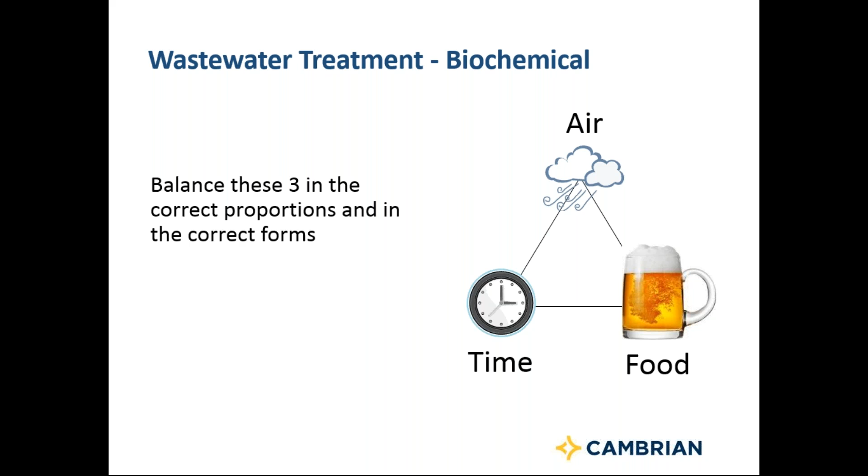That's super cool. In terms of aerobic treatment, you basically balance air, time, and food, and you get spontaneous bacterial colonies that adapt to that waste stream. One thing we've talked about several times today: the more consistent the environment you can provide, the better off you're going to be for biological treatment. You're really nurturing BOD removal, soluble BOD removal—creating an environment for living organism communities to do the work for you.

The critical design process constituents you're looking at are flow and food, plus air and time which we've already discussed. How much property do you have? This is where you're starting to see some restrictions on some facilities.

Aerated lagoons are a really nice, easy, simple technology, but they take up a lot of space. So there are some new modern constraints being placed on industry in terms of how much land area they have—encroachment from subdivision development, and the occasional odor issue in a lagoon, which once upon a time maybe didn't make much difference, now it does. Odor control itself is indirectly related to BOD—high BOD wastewaters have a greater opportunity for odor issues than low BOD wastewaters, for instance.

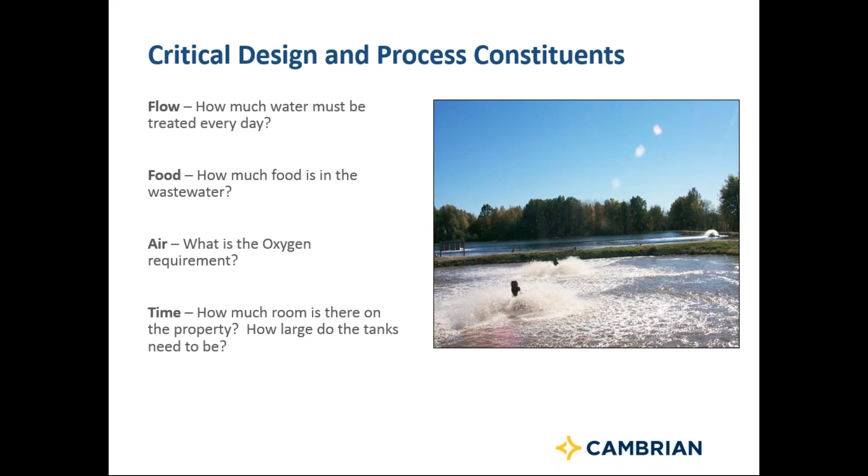Wastewater treatment chemical pH control is the most common, very beginning of a wastewater treatment train. Food and beverage wastewater in the US tends to be low pH, slightly acidic, but caustic is often used in cleaning processes. If you have a large volume to do pH adjustment in, an EQ tank, as Dan mentioned earlier, is a great way to do self-buffering. If you're doing it inline with a smaller tank, that's lower capital cost, but you're having to buffer out all the fluctuations in flow and load, which is more difficult.

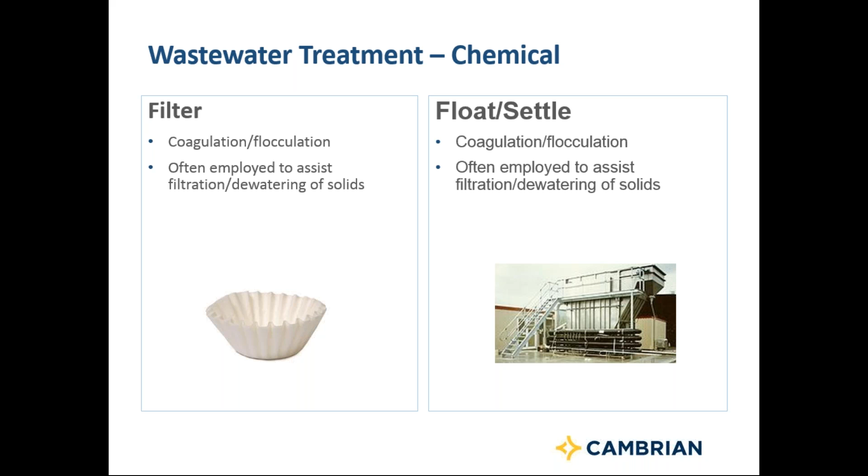Chemical treatment further helps with filtration, coagulation, flocculation, and is often employed to assist dewatering of solids, and then to float and settle—whether you're creating a floc so you can use a DAF, or increasing settling efficiency in a gravity clarifier.

Overall, I'd like to end the treatment part by saying the unit processes are just like this municipal plant—they're all the same, just employed maybe with a little more technology, like a DAF for solid separation. If you're looking at primary settling basins and grit removal, it's very analogous process-wise to a full treatment plant, but recognizing that often we're looking at putting several of these treatment processes in a train on an individual property managed by folks that make French fries, as opposed to having a whole staff of professionals whose entire goal is producing good, clean water. That's the challenge we're imposing on some of these industries.

Making that as easy as possible is something that is big on my radar screen.

And we can't ignore the fact that the stuff they do inside the facility is huge for the efficacy of the downstream treatment. They have a lot of control over what they do. If we put together a structure where they're incentivized to discharge everything downstream because they've already reached the highest level on their wastewater surcharges, you're going to have to deal with it downstream. But if they're incentivized to help with source separation, good habits, not dumping the hose on the floor when they're done using it, all those things can really help as well.

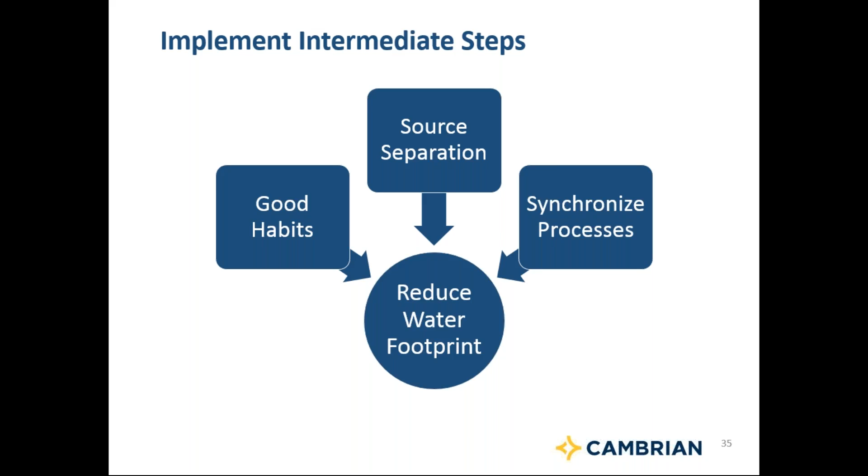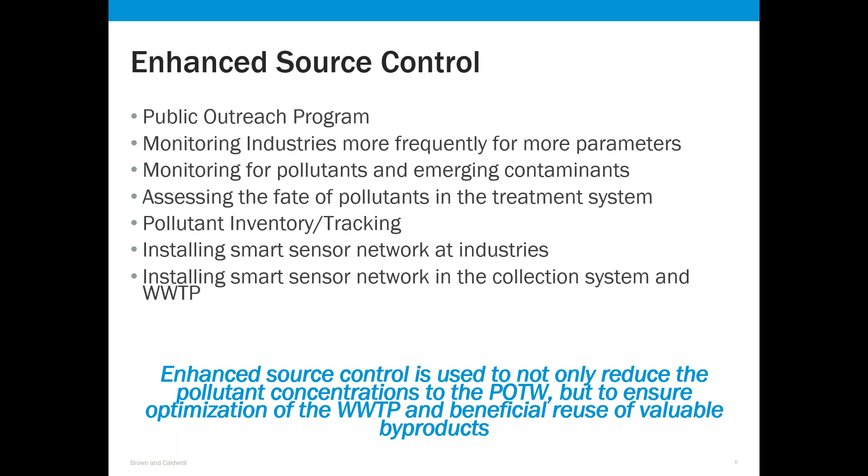I'd like to introduce you to the concept of installing these sensors at the industrial users' permitted points. There are numerous benefits to this. We first start with identifying the parameters of concern that people would like to measure. We then identify specific sensors and install them at the industrial user's discharge monitoring point. We may also install the same sensors, as I mentioned on the previous slide, at the influent or the effluent of the water reclamation facility, the wastewater treatment plant, for impact analysis.

We will then develop and deploy dashboards with advanced analytics, with the various thresholds and alarms or notifications, so that when we hit those thresholds, we then notify the pertinent people within the organization, or maybe even more specifically, we automate the notification to the industrial user that their industrial discharge is approaching or even out of compliance.

And so, just a note, to date, we have not had any issues with pushback from these industries. In fact, it's been quite the opposite, and we'll talk more about this later. But it's actually been pretty eye-opening, the responses and just collaboration that we've gotten from the industrial users to date.

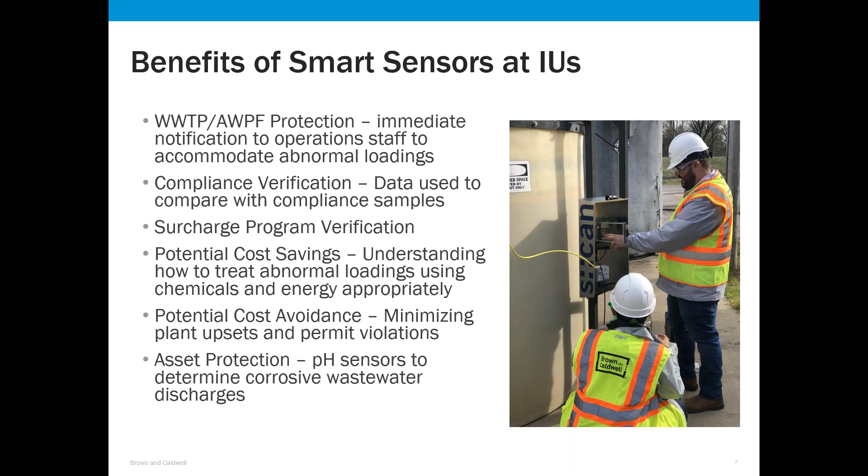We can obviously increase NPDES permit compliance at the wastewater treatment facility simply by using this data beneficially to make operational changes, or to know when abnormal loadings are headed your way to the treatment plant. We can make those operational changes that we need in order to protect the plant and to help protect the facility's permit compliance. And then finally, it can provide asset protection within the collection system by sensing corrosive conditions discharged from these industrial users into the collection system.

So what do we mean by smart sensors? It's really just the concept that the data collection and the physical process drastically decreases human involvement, for just a large array of various water quality parameters. The data is collected and transmitted wirelessly and then can be analyzed in near real time.

So now let's talk real world. Let's talk about the city of Memphis and their pretreatment program and how they have supplemented their source control program with these digital solutions. Memphis is considered a large pretreatment program with over 100 permitted significant industrial users. These users discharge on average approximately 30 to 50 million gallons every day to the city's 2 wastewater treatment plants.

But what truly makes Memphis one of the most unique programs in the country is that the top 15 significant industrial users discharge 500,000 to 14 million gallons every single day of the year. And the organic BOD and TSS loading from these users on average is 50% of the total loading to the plant and can be as high as 90% of the loading.

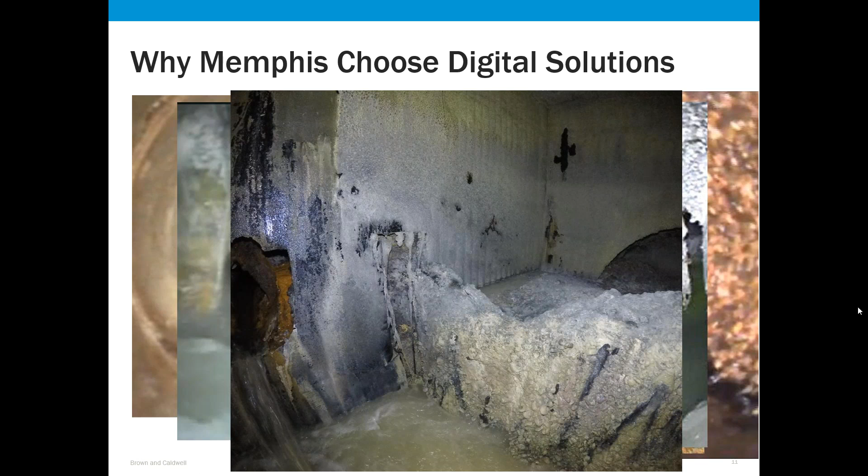So I'm just showing you the issues in the collection system. We haven't even talked about issues at the wastewater treatment plant. And so I think it's pretty obvious and apparent that the discharges from these industrial users truly can have an impact, not only on the collection system, but on the treatment facilities as well and how they operate.

So Memphis decided to invest in a pilot study or a pilot project where 5 of these smart sensor water quality stations were installed at some select industrial users and at the influent of the wastewater treatment plant. These sensors continuously measured multiple parameters, but the primary parameters that Memphis was most interested in were BOD, TSS, COD, and pH.

And obviously, the pH data, you can see from the previous images why we were so concerned with pH. The COD data was very useful because Memphis was in the process of developing and then implementing a new COD surcharge on industrial users for high strength waste. And the data was used to quantify the amount of COD loading that was truly coming from each and every one of these facilities in real time.

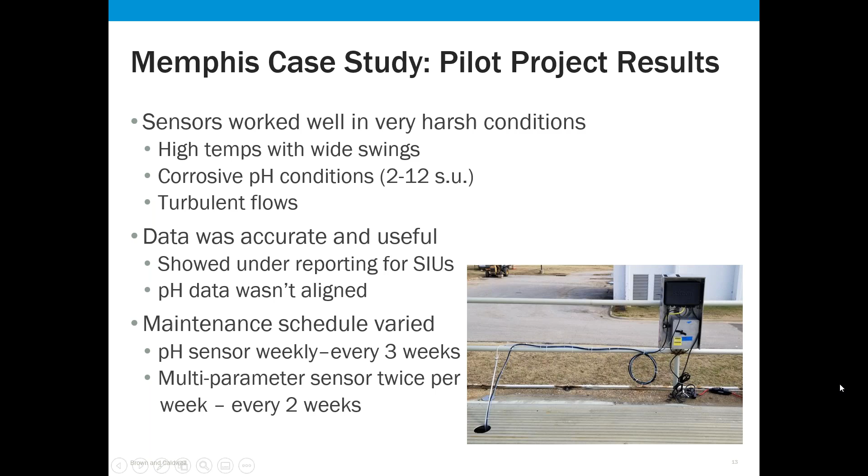So just to be fully transparent, this project did not come without some of its own unique challenges. However, for the most part, all of these were overcome by fairly simple solutions. The initial pilot, as I mentioned, included 5 of these smart sensor stations. In order to see the data, you had to log in to each station individually. This was problematic in just trying to determine if an industrial user and their discharge was causing any impacts at the wastewater treatment facility.

And so this was ultimately overcome in the next phase of the project, but I'll go ahead and mention it here, with an integrated data platform, and we'll see some screenshots of that a little bit later, where all of the data sources were combined into one dashboard panel for easy viewing purposes.

The sensors do require to be continually submerged to prevent fouling and inaccuracies in the data. And so at all of the installations, for the most part, it was a continuous flow, 24/7. And so the sensors were continuously submerged for that.

And in scenarios where they couldn't be fully submerged in the stream of flow because of, let's say, an intermittent discharge, we were able to overcome that with a flow cell, where essentially we just pump water up out of the flume or out of a pit or even a manhole, push that across the sensors, and then discharge it back into that flume or into that manhole. And ultimately that helps us to overcome that issue of it continually needing to be submerged.

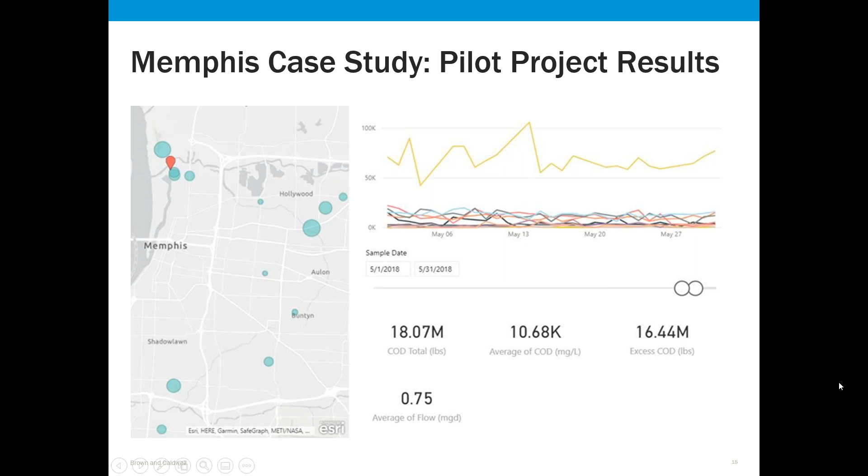So now we move on to the next phase, which we call Phase 1, and it included Memphis actually purchasing sensors. The previous pilot project was a rental project. Memphis did not outright purchase the equipment but simply rented it due to the fact that it was more of a proof of concept. Ultimately, the proof of concept proved to be very valuable, and Memphis then moved forward with Phase 1.

We purchased 10 sensors and installed these at the permitted industrial monitoring points. It was important for Memphis that the sensors were installed at the permitted monitoring point, not out in the collection system somewhere downstream of the industries. This was simply because Memphis didn't want industries to be able to say they couldn't 100% attribute data out in the collection system to their specific industrial discharge, so we wanted to eliminate that right off the bat.

So we dropped these sensors right down into the same location where Memphis would install their 24-hour composite samplers. In some instances, we're literally hanging sensors into the stream of flow right beside the industrial user's pH sensor. The data is recorded by the sensor and controller, and then we send it to a secure cloud-hosted server where we capture this data and ingest the raw data into a big data platform.

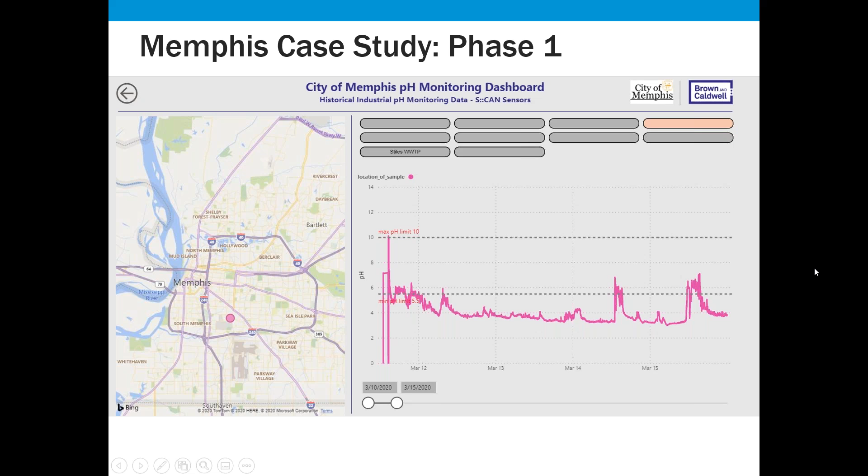Memphis utilizes the Linko CTS database to help assist them in compliance tracking, and so on and so forth. Some of you may be familiar with that software. Essentially what winds up happening is all the data comes in at the end of the month, or for the previous month, and gets put into the Linko database, and then they can run compliance on that data, take enforcement action, so on and so forth.

One thing we've been able to do that's been really cool for Memphis is that through APIs, we can actually pull data out of Linko and push it to our dashboard. What we wanted to accomplish here is to confirm and verify the data that industries are reporting in comparison to the data we're capturing at those industrial users.

Remember I told you earlier in the presentation that during the pilot project, this data did not line up very well. That's still proving to be the case even now in some instances, where what we're doing is pulling out the industry's daily minimum and maximum reported pH and comparing that to the smart sensor's daily maximum and minimum pH. I just pulled a random day.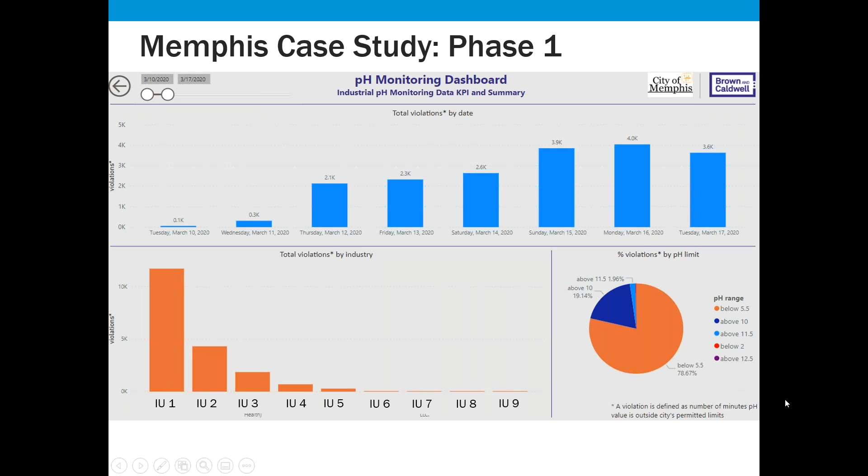And then we break it down just a little further of all the pH violations. Memphis wanted to see how it broke down with respect to specific pH ranges. So we just want to know how much of it was below 5.5 or above 10, which is their permit limits. And then let's take that one step further: how much is above 11.5 or 12.5, and then below 2. Those were the ranges Memphis was primarily interested in seeing.

What's truly amazing about this project is not just that Memphis now has access to real-time data, but that it has drastically reduced non-compliance from these industrial facilities. We captured the first 2 weeks these sensors were installed at the 10 industrial users compared to a random 2 weeks selected back in July. We saw the total minutes of pH non-compliance decrease from over 40,000 minutes to just over 8,500 minutes. On average, they were violating 3,100 minutes per day back in March. Fast forward to July, and they were only violating approximately 658 minutes. That's a 79% reduction in pH non-compliance, and that's truly what Memphis was seeking to achieve.

Phase 1 is still ongoing, but has been very successful up to this point, as the previous slide mentioned. Once again, the sensors are working pretty well in very harsh conditions and providing reliable data that can be used for data-driven decision making.

The dashboard panels have been a great addition to the digital solution and have been very well received. It's easy to access, and anyone can access it from anywhere. That's the benefit of it. It can be used from your workstation, to your tablet, to your cellular device. Anywhere you have access to this particular dashboard, we're utilizing Power BI. So anywhere you have internet or cellular service, you can hop on the dashboard and take a look and see what's going on.

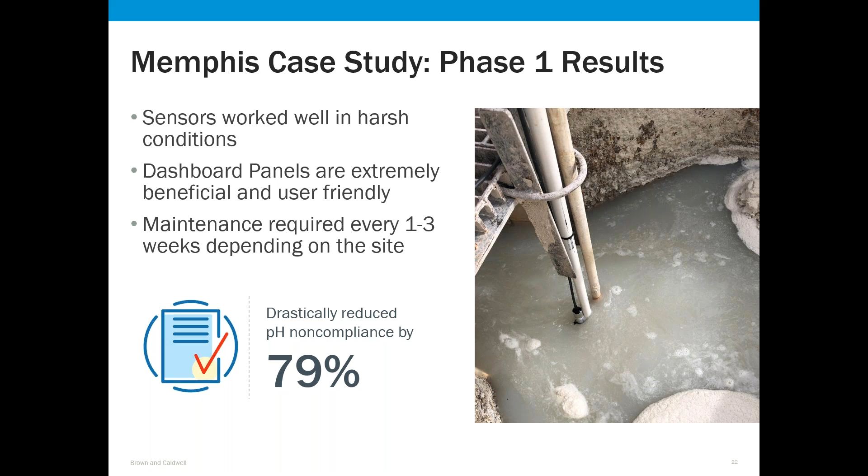One thing I want to touch on real quick in our last few minutes is that, secondarily to the dashboard and real-time pH monitoring sensors we're installing for Memphis, we're also helping them integrate multiple data sources into one integrated data platform.

So just real quick, we'll run down a few of these. We're going to pull in all of their Linko industrial discharge data, data from their laboratory, and also their wastewater information management system, or WIMS, which includes process data conducted by operations staff as well as some lab data. We're also pulling in meteorological and hydrologic data from USGS and the Army Corps of Engineers.

But more importantly, we're going to pull in real-time industrial discharge data as well as SCADA data from the treatment plants, to then truly be able to start trending and tracking potential issues within the plant, out in the collection system, or at industrial users.

So let's take, for example, we see an increase in the influent and effluent TSS. We can then pull up SCADA data to check operational parameters, and pull up the real-time sensors to see which industrial users in the last 24 hours have discharged higher than normal suspended solids loadings, and so forth.

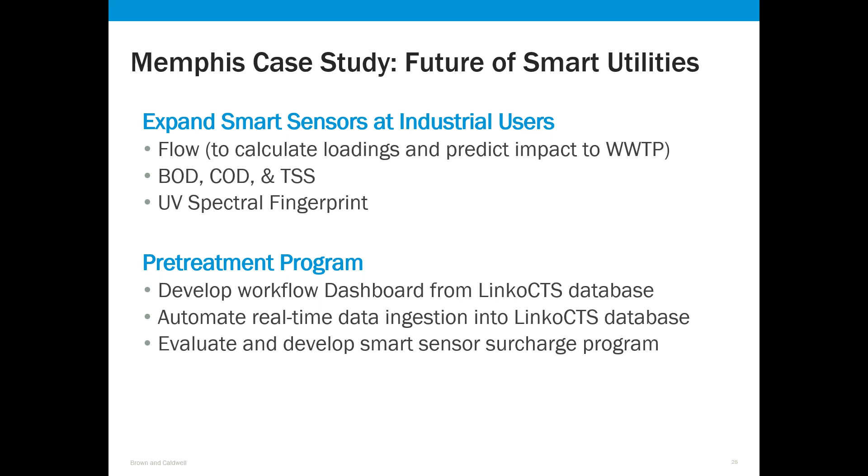We're also looking at automating real-time data ingestion back into their Linko CTS database. So we're capturing all this pH data right now. Memphis wants to use that for compliance purposes, but needs it in Linko so they're not manually taking enforcement action — it's all trending and calculated in the database once they start doing their annual report at the end of the year.

Then briefly, for the wastewater treatment plant, we're expanding the integrated dashboard to include some analytics. We're going to look at disinfection in comparison to COD loading and color coming into the head of the treatment plant, and look at energy usage in comparison to real-time BOD, COD, TSS data to see where we can optimize energy usage, specifically with the aeration and blowers, and how we can decrease that based on a dynamic approach.

We're going to look at predictive and prescriptive analytics, where essentially the database or the dashboard becomes smart over time. When we see a certain discharge from an industrial user, we can then correlate that to a potential influent loading headed to the wastewater treatment plant.

In the collection system, Memphis already has a lot of pump station sensors, but it's all on various dashboards and telemetry devices. They also have a lot of level sensors throughout the collection system to help track sewer overflows. So we want to integrate that all into one dashboard to make it easier to use, and help them actually start predicting and preventing sewer overflows.

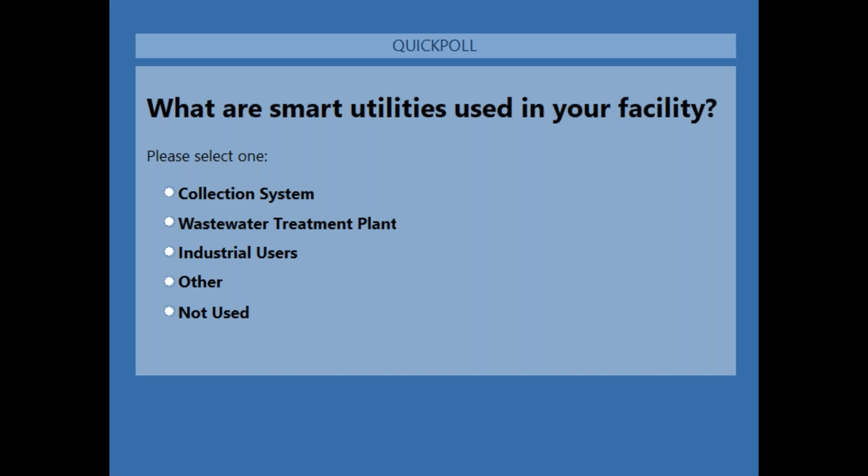We had two questions about the UV spectral fingerprint monitoring parameter. Can you provide an overview and how is it usable? The UV spectral fingerprint essentially uses UV light and absorbance to develop a curve across varying UV wavelengths, and that curve develops what they call a fingerprint. That fingerprint can be compared to textbook data to help determine what the potential pollutant can be. A lot of the sensor vendors we use talk about how their sensor doesn't measure zinc specifically, but zinc has a specific UV spectral fingerprint, so that data can be correlated to a particular parameter. The project they always refer to is when the influent of the wastewater treatment plant gets a slug discharge and they don't know what it is. The UV spectral fingerprint may not capture actual concentrations, but it can help narrow down the particular parameter being discharged at high concentrations.

Okay, great, thanks for going into a bit more detail on that. Did the city have to alter their sewer use ordinance for the use of the sensors? Memphis did not. Memphis's ordinance was written generically enough to give them the authority to conduct monitoring. It didn't go into a lot of detail about what monitoring specifically is. So for Memphis's case, this was really no different than going and installing a 24-hour composite sampler at the monitoring point — it's essentially the exact same thing. So to answer the question, no, there was no modification to their sewer use ordinance required.

Would you be able to give a general cost per installation? I know that's an important question to a lot of the viewers. It's totally dependent on what water quality parameters you're trying to capture, so it's really not that cut and dry. I can tell you that just purchasing, in Memphis's case, the pH sensors they're currently using — that total station, just the sensors alone and the telemetry device — is somewhere in the $3,000 to $4,000 range. As you start adding additional water quality parameters such as UV spectral fingerprint, BOD, COD, TSS, those sensors are a little more expensive, but they plug and play directly into some of the existing infrastructure Memphis already has. So they're not having to buy a total station, they're just having to add an additional sensor to a station that's already there and working.

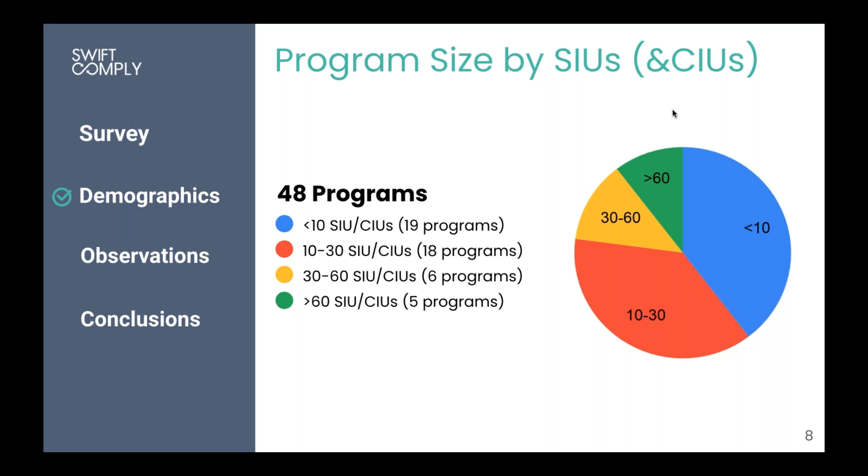So just to give you a sense of how it broke down, this was a little bit of a back and forth during the analysis to figure out what buckets to create for these characteristics. So number of SIUs and CIUs ended up breaking out into less than 10, 10 to 30, 30 to 60, and more than 60. And this just seemed to be where there were differences in the responses. You can see they're not evenly distributed across the programs. There's a lot more data for the smaller side than there is for the larger side. That's how it broke down that element. And then the other element we broke it down by, which is a little more distributed, was the number of FTEs in the program: less than 2, 2 to 5, and more than 5.

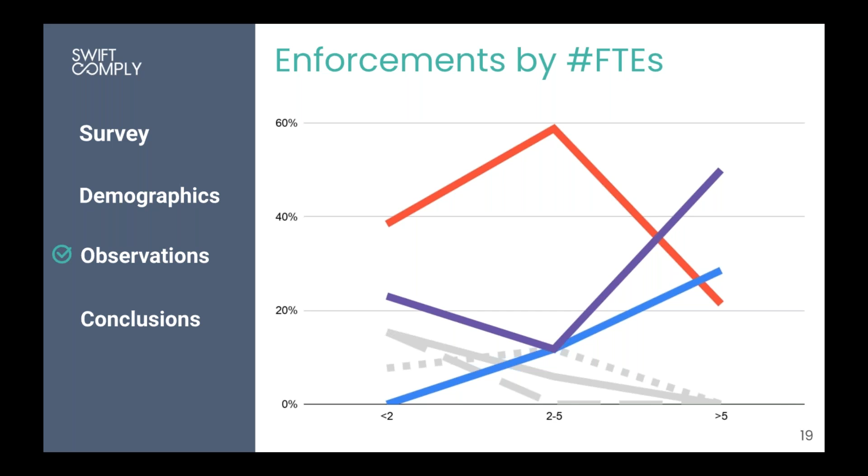Oh, there was one more, sorry, permits also was paper. And this one, you'll see that custom built pretreatment specific system is also creeping up in this case. So it's still pretty paper focused, but there is that other element where the custom system does come into play. These are not too clear cut by SIUs, but it's really clear cut by number of FTEs. And the breakpoints seem to be pretty consistent there.

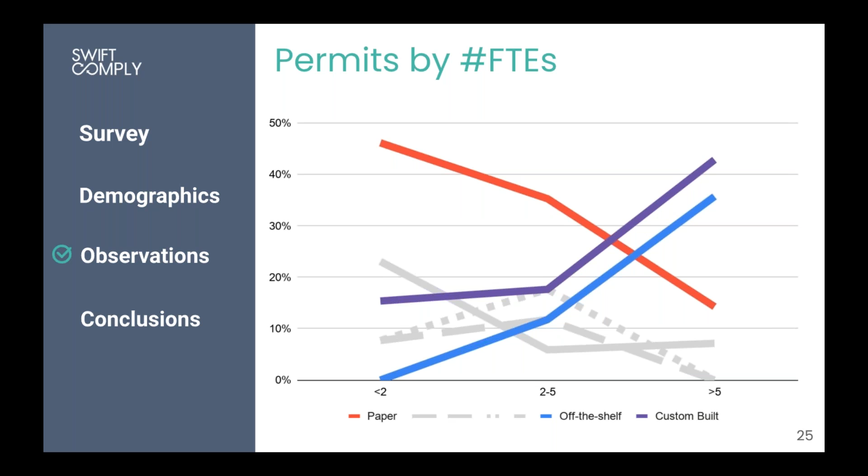So there was another category of features that all had their highest system type be Excel. And again, we didn't do analysis of why for each, but here's some characteristics, some pros and cons of Excel that might lead folks to use it for different feature types. So similar to paper, there's a low initial cost and it's pretty customizable. There's a little more of a tech requirement than paper, but it's still pretty low.

The great thing about Excel in this case is for applications that have a lot of data points, there's obviously much more analysis and reporting capabilities. And there is a little bit more of an ability to share snapshots and graphs and charts and ways to see what is happening and share that with your team.

I think the downsides to Excel in this case would be that you're still not getting any analysis or compliance overview or information without someone manually going in and monitoring that information and doing the analysis. And typically one person owns Excel sheets in that way. So it's a little harder to work as a team in this type of environment.

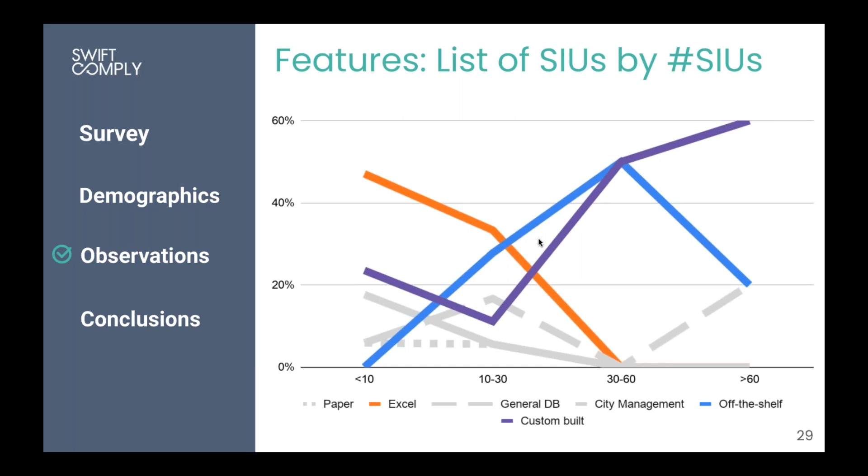So you'll see when we start going through these three, there's a pretty marked difference that Excel really dominates these feature areas. And again, similar to the paper ones, the custom built does come up in a lot of these, and we'll get into that in a minute for the items where that's higher. So looking at the SIUs and CIUs, whether that's predicting the usage, it's pretty good for the list of SIUs. FTEs is probably a little better predictor.

Sampling results, similarly, we see pretty much the same breakdown of the different types. And in this case, looking at SIUs isn't quite as good as looking at FTEs for predicting.

Let's see, list of NSIUs. This one's a little different. This was spread out a little more, even though Excel was still in the lead. This one spread out a little more across all these different types of systems. Again, we broke it down by SIUs, and this one, I would say that one's not working at all. I think FTEs is probably a better predictor for this one.

There were a couple where paper and Excel were pretty even as the leaders. Annual reports and surcharges, and again, these are probably the ones that are data heavy, and it's just interesting to see that the two were pretty equal, as you can see here, and they do follow relatively the same trend here, the paper and the Excel.

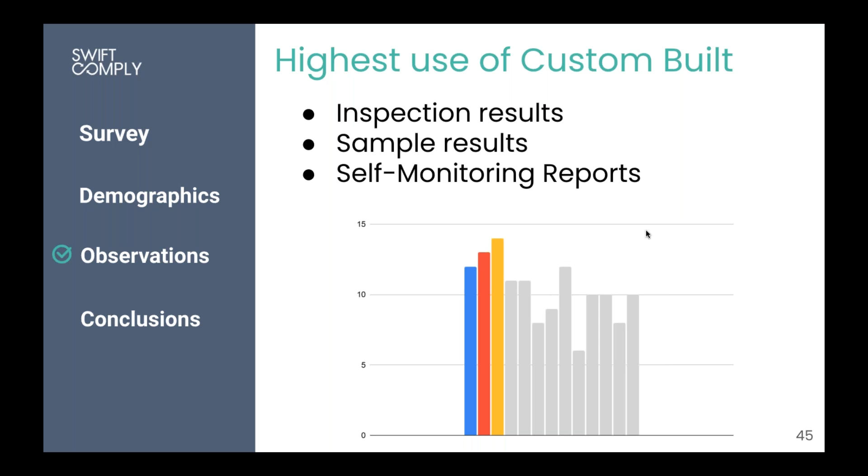So it makes sense, most of these are not surprising, but you can see that the gray bars next to there, there's not a huge gap. There is custom built system being used across the board, but these are the three that really stood out for using this type of system.

So for sample results, you can see, like I was just saying, it's pretty spread out, but custom built really does win out in this category. And we can look at SIUs as a pretty good indicator here for what type of system gets used, and FTEs as well.

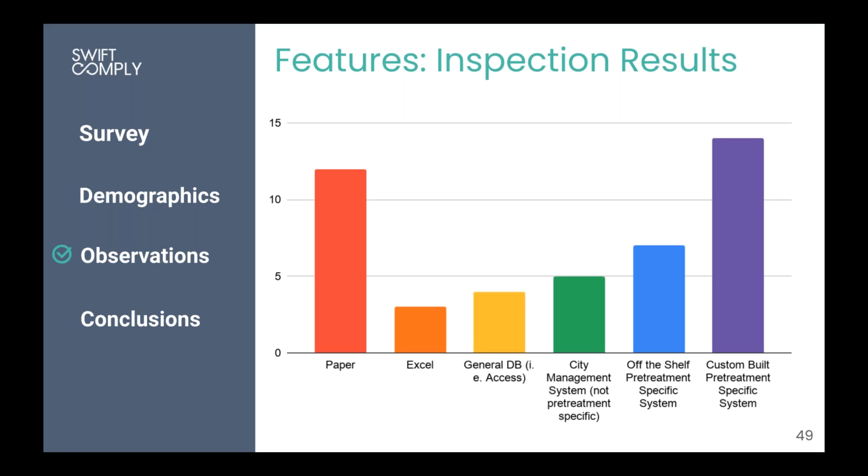For inspection results, I think this is pretty typical in that the balance is between paper and custom systems. And these again are really good indicators, the SIUs and the FTEs. Both of them react the way that you would expect.

Self-monitoring reports actually seems to be pretty spread out. The indicators are still pretty strong in these as well, but not as strong as some of the others.

So that we're kind of getting into the area where the last bucket of features is that there's no real clear winner on which type of system is used.

This one, to me, probably means that this is a feature that's hard to come by in most systems, that the system itself isn't able to deliver a compliance answer, that it still requires a human to go in and monitor and manage the data in those systems to come up with compliance answers.

So you'll see it's pretty spread across there, and there's not really too great of indicators by the size of the program.

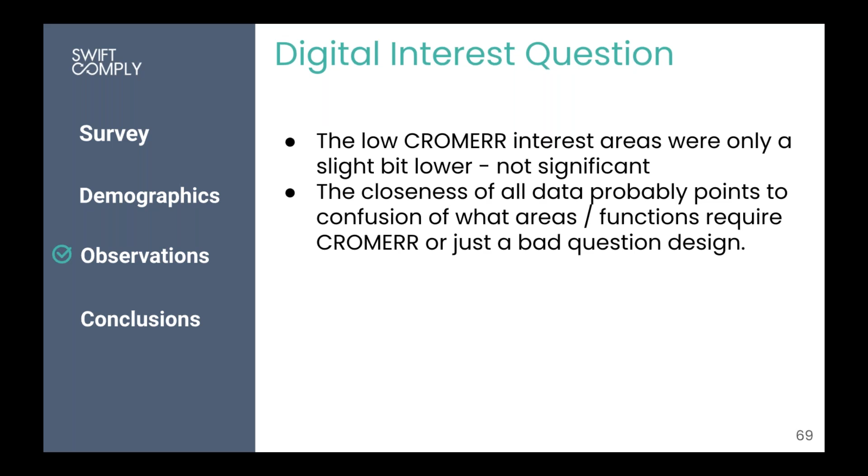So we didn't end up getting a lot of granularity. There's a couple that stuck out, but they weren't much higher than other areas. And so I think that we probably should have asked what are the top 2 or 3 features that you would invest in getting a digital solution.

So generally, the interest is high. That's 2/3 - when a third answered no, the other 2/3 all answered yes, they're interested in digital, but I think the question needs to be redesigned to get a little more information.

Let's see. So are there any questions about the survey itself? I haven't had any additional questions yet, Betsy. Okay.

Great, let's see, I'm trying to think if there's anything else to go over. There's a lot of really good information and very interesting to see the survey results and analyses. Yeah, I think it'd be interesting to see if it changes over time also, and improving the question to be more around what people are looking for or interested in doing would be the next level of information there.

I wonder if there would be an interest among the folks listening in now to either retake or have an opportunity to take this survey so we can share the info. If you are interested, let us know in the QA box. And perhaps if there are any folks interested in doing a second round of data collection now that we understand more, just chime in and we'll gauge it from there.